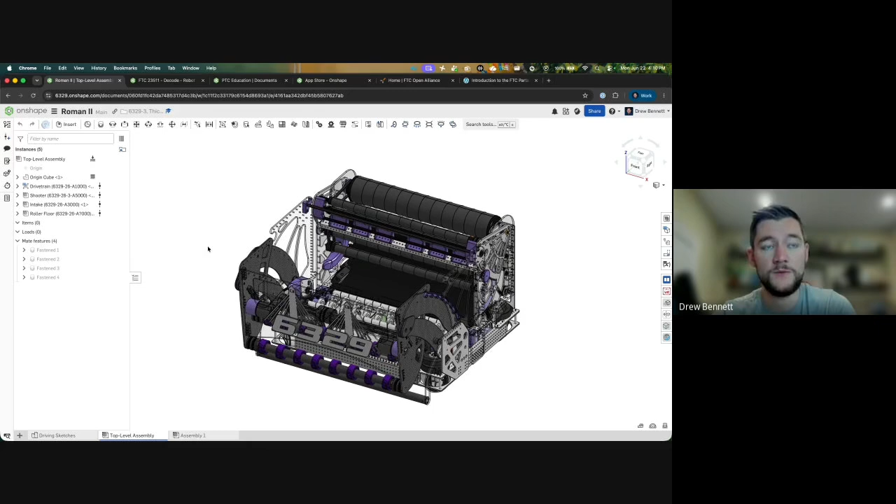And also, like Google Docs, I will open up one of my robot models here. You're able to share this with anybody so they can work collaboratively with you at the same time. When you're making a complex model like this, there's a whole lot of parts, probably a couple hundred different parts. That's too much for any one person to manage on their own, so that's why we have teams. Everybody needs to work together to design all these different mechanisms and then put them together. OnShape makes that really easy, as you can do a lot of distributed work and then combine it all together to see what your final robot is going to look like once you actually make it.

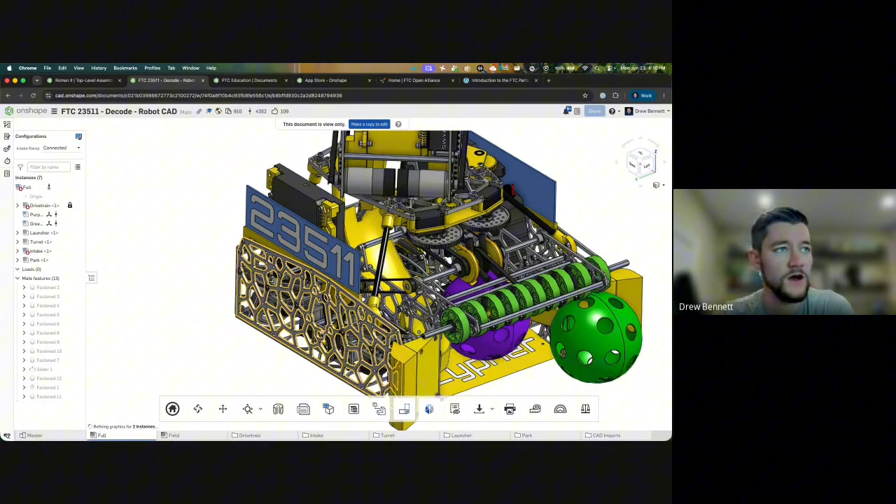So as you can see, I've got an FRC robot pulled up right now. I can also pop over - I'm a big fan of the Seattle Solvers, I love the models they put out every year. I think their models do a great job of highlighting all the different manufacturing techniques you can use with OnShape. You can see all of the yellow components are 3D printed, so a huge amount of 3D printing on their robot. But also you can see all the different CNC routed or fiber laser cut components, combined with a lot of components from a mix of goBILDA and probably some Axon servos. I see a couple different Bear motors in here - those might be goBILDA, might be AndyMark, one of them might be the Rev stuff.

Yeah, so I do love making models like this, and I will dive into this a little bit more to explain how you can make something like this. But yeah, at a base level, OnShape is cloud-based CAD that you can log into from anywhere, access your models, and collaborate. So that's what makes it so powerful.

As you can see, if I get into something like the past robots and open up one of the old ones, you can see there's a ton of different designs in here that show all the different mechanisms that worked together to make a top-level robot. What's really nice about that is it makes it easy for different people on the team - everybody can take a different mechanism and work on it, and then combine it all together at that top level to create one robot.

With that said, that is OnShape sort of at a high level. Now we should get into a little bit deeper - let's actually talk about what is a good robot to show here. I might actually skip back to the 2024 robots, this one is a little bit more fun. So I'll show this robot at a high level, and then I'll actually dive into the sub-documents to explain the thought process here.

What I highly recommend, and I think FRC teams tend to do this pretty well - I feel like FTC teams haven't necessarily adopted this practice yet - is that, as you all know, robots are made of a bunch of different sub-assemblies. You're going to have your shooter, your extension mechanisms. I know those used to be more popular in FTC, but those have kind of changed with the recent rules - you can't do the crazy horizontal extensions anymore, but some of the vertical extensions are still pretty nuts. You're going to have things like that, and then you're also going to have your shooters and other things.

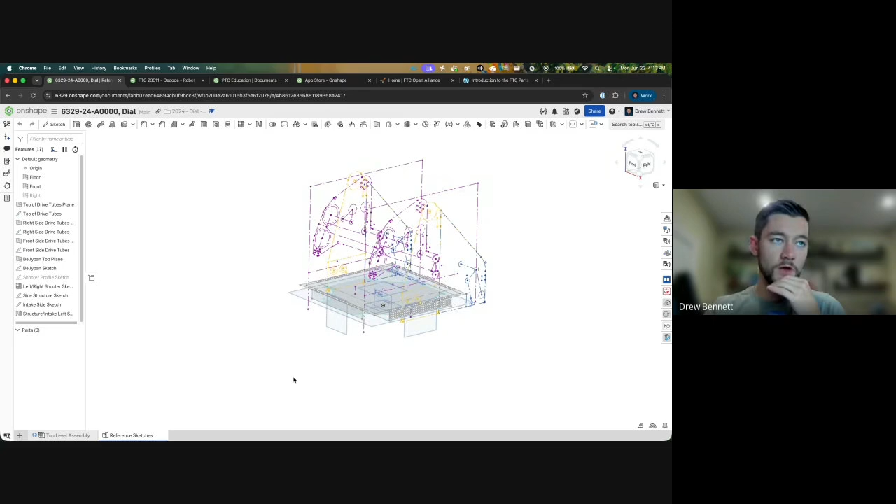What I recommend is that instead of doing everything in one OnShape document, you do it across multiple. I'll show OnShape's different process and tab options, as well as the full top-down design process.

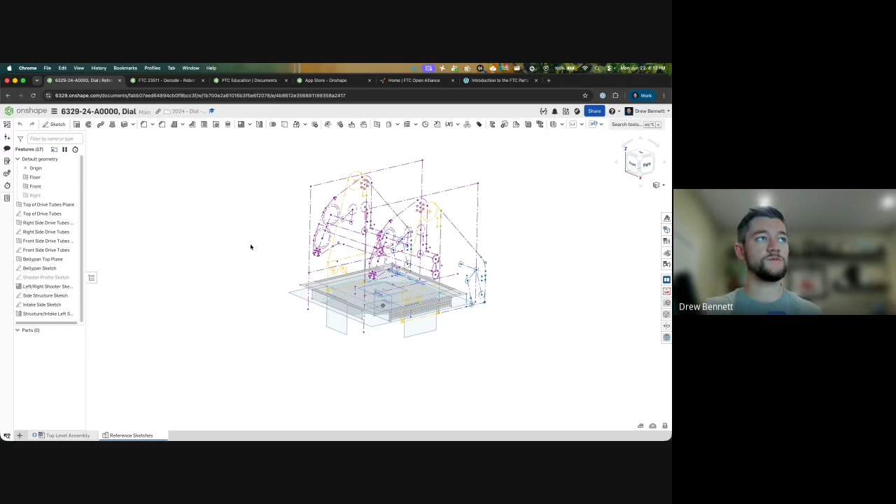The number one thing to do can be one of the trickier parts, and it's usually up to your design leads to figure out. There are good resources for learning this process, and I'll show those. You're going to want to implement top-down design techniques, which start with a sketch to define where everything goes.

As you can see, I've got some different colored sketches here. If I zoom in, it's roughly laying out the dimensions of the drive base and some common mounting holes. Looking at it from the side, it's laying out key motor locations, intake roller locations, shooter roller locations, and pivot locations.

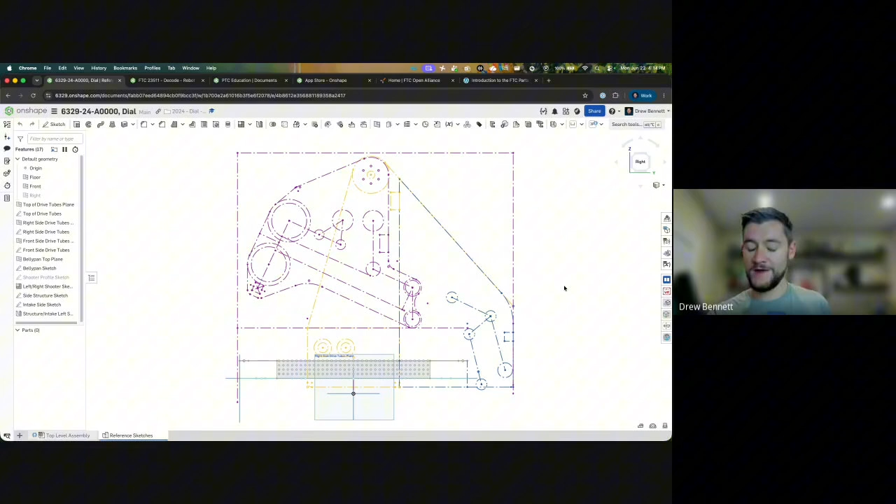Realistically, all the robots we build for FRC or FTC can be broken down into a complex series of rotating shafts, whether that shaft is pivoting in an arm, pivoting for a shooter, pivoting to move a turret, or running an intake roller. Everything is basically a spinning shaft, and the key to a great robot is putting all those shafts in the right spot. That's really all it is.

You've got to place everything correctly, make sure your belts are tight, your chains are tight, your intake roller locations to the floor are correct. You need good compression, not too much, not too little, because otherwise it won't pick up anything. Defining those at the sketch level to start is super powerful, because then you can use that to drive the entire rest of the design.

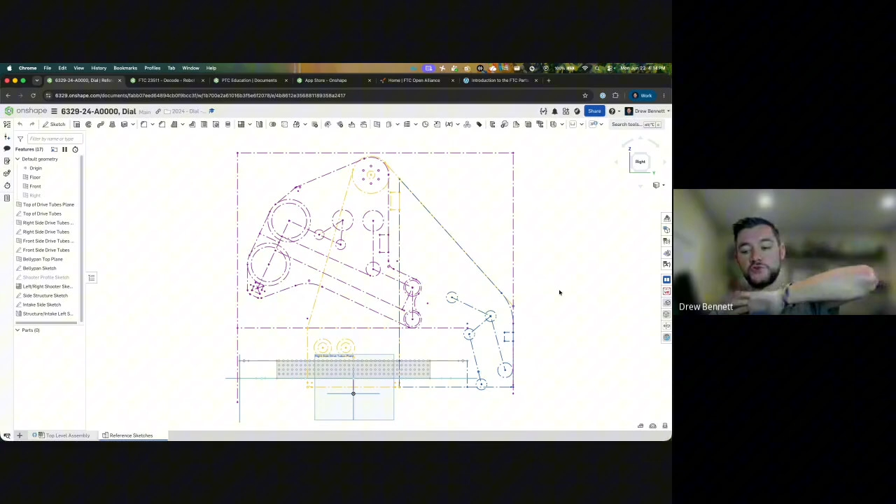I can open up one of these sketches so you can see this defined the dimensions of the drive base here. And if I get into it, I can show something like the side structure sketch.

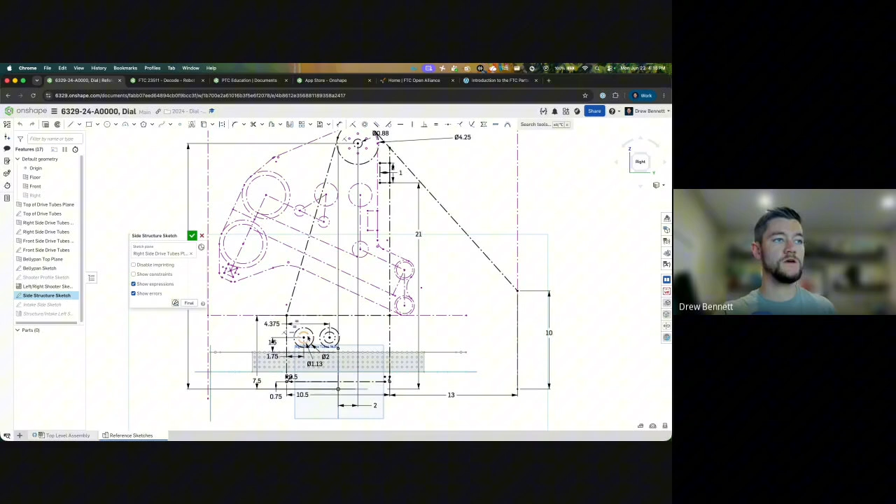You can see this is defining where a couple of different motors are going. This was driving the actual pivot all the way up here. You can see laying all that out and showing where the motors would go to also drive the intake up front, laying out some of the key panel dimensions.

Same with the intake, this one makes a lot more sense. If I zoom in, you can see this intake roller is defined as a size, as well as how far it is from the floor. So we know it's going to be exactly—I grab that bottom plane there. You can see minimum distance measured down is 1.84.

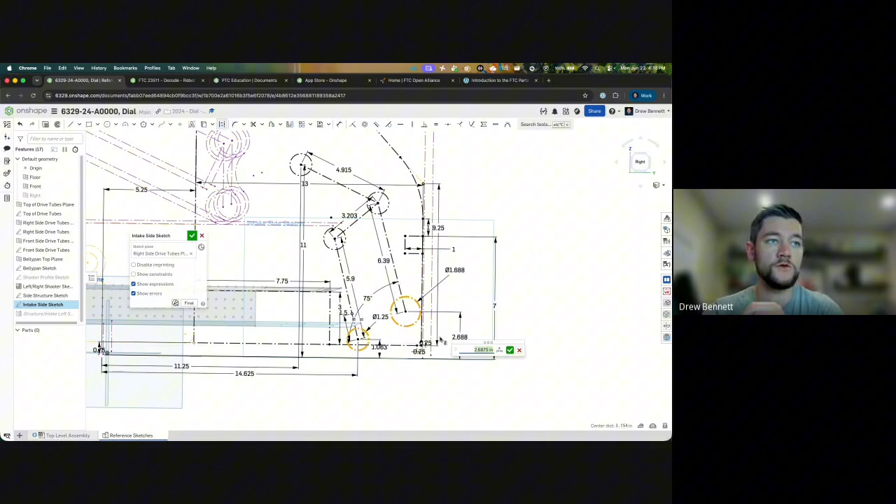So I know that compressing that game piece, it's going to be that distance from the floor, and that's a number I can edit and change as needed, also changing all the subsequent rollers off of that one. This one needs to match a specific belt spacing based on the pulleys I choose. This roller to this roller needs to fit a specific compression, so I'm not squeezing the game piece too much, or not having enough compression, so it will make it up through the system.

So step one is making your sketches. If you're wondering how do I learn how to sketch, I'm going to skip over to the OnShape Learning Center.

I want to put this relatively early so everybody knows this is a resource you have, and I'm going to keep going back and forth between things I can show in the Learning Center. Up next to the share button, you can click Go to Learning Center, and it's going to open up learn.onshape.com. I highly recommend everybody checks out the Learning Center.

This is basically a mandatory learning location if you want to be proficient with OnShape and successfully design an FTC robot. So if you're looking to learn these skills I am showing, the best thing you can do is go to the New to CAD section, where you'll see a pathway on Introduction to Sketching.

Of course, I don't expect you to be able to make all these complex sketches I just showed, but if you go through a course like this, which takes roughly an hour—honestly, I think most students can do it a little faster—you'll be able to do the things I was just showing.

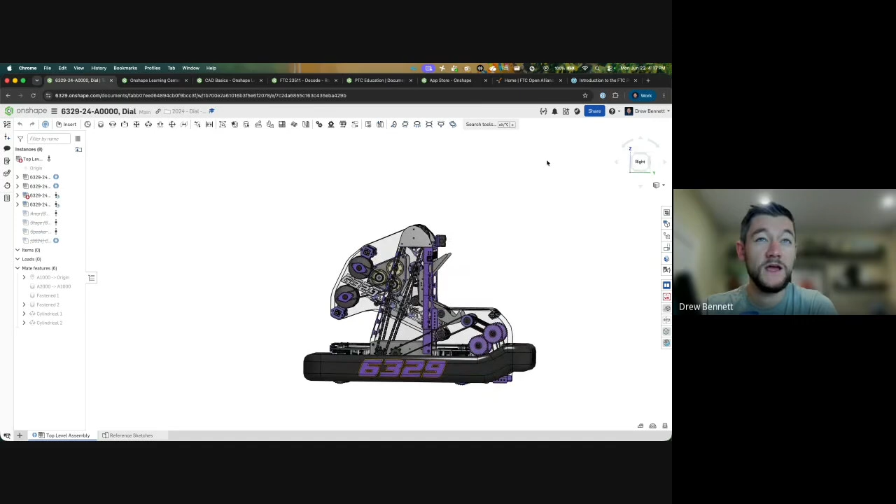So yeah, most robots should start as a sketch, laying out where all of your different mechanisms should go. And now if the assembly will load, there you go. You can see that if you squint really hard, it kind of does look like the sketch. You can see where those roller locations were in reference to those sketches. You can see that the overall larger shooter wheels, as well as some of these feed wheels to hold the game piece and pass it into the shooting wheels, are in those locations. So those sketches did drive the ultimate architecture of the much larger robot, which is pretty cool.

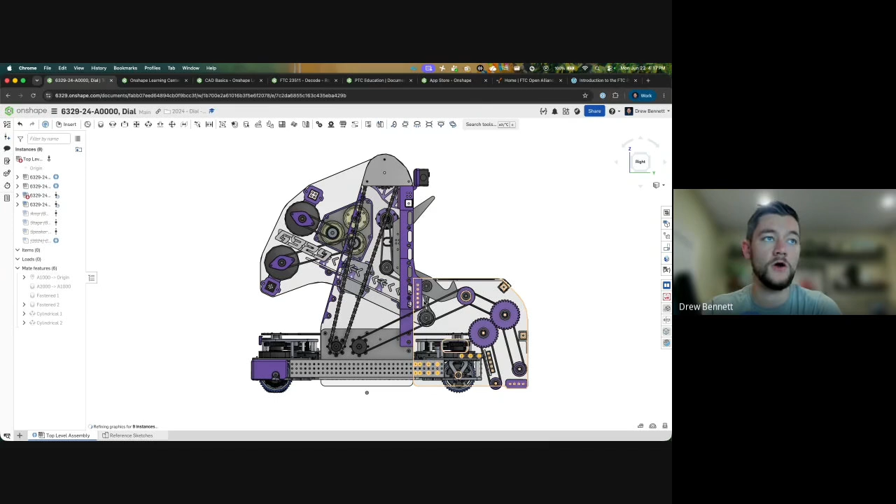The major benefit of that is two things. One, you can bring these sketches into all of your sub-assemblies to make sure that they're all going to line up and are all referencing those same locations for any of these circles, shafts, or different points.

And if you do it correctly, when you update a location - let's say I figured out that the compression between these two rollers is a little bit too tight and I need to make a change there - by editing this one sketch, editing those numbers, I can actually change all of the subsequent parts of the robot. It'll all update pretty quickly. So that's pretty cool.

So from there, once you've got this set up, you're going to need to start actually making your parts. All I've done right now is make sketches. That does not get you a robot. You need to start actually 3D modeling instead of just 2D sketching.

So I'll go back to my folder here and open up something like - I think the intake one is pretty good, this shows off the process pretty well. As you can see right here, it's going to contain all the different plates. It's going to take a second to load because my internet is bad. Awesome, cool, there we go.

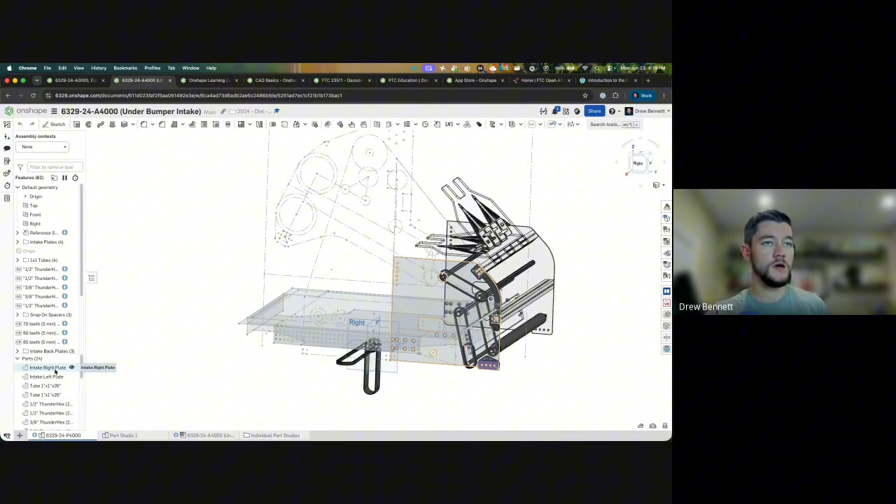So you can see here that I have imported those sketches. Let me organize my thoughts. As you can see, it kind of looks like an assembly - there's a whole lot of different parts here, but these are all individual parts modeled in place to make the assembly process much easier, and to make sure that when I've modeled a part to fit in a location, it's going to fit in that location.

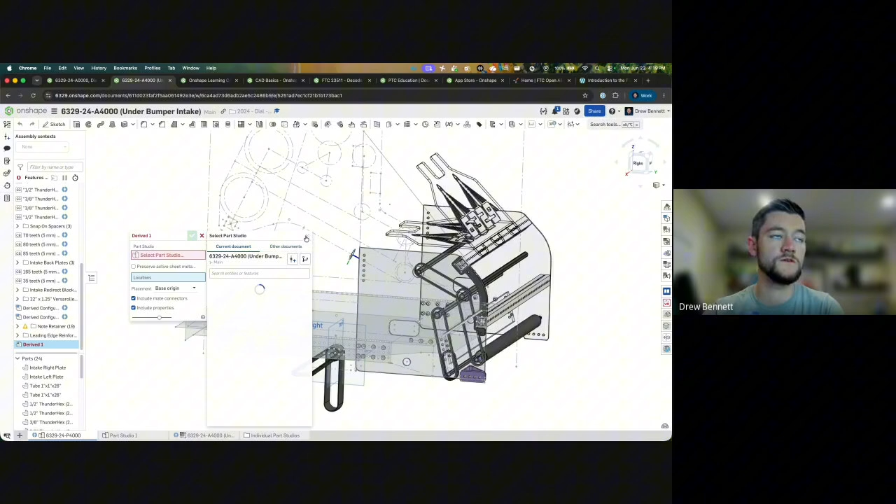So you can see the very first thing we do is import those reference sketches using a derived feature. The derived feature is up here - it allows you to bring in reference material from any other location in OnShape. So I went to the other documents, found those sketches, and derived them into this one, just so I had all of those different reference locations that you can see. I can click any one of them, measure to them, bring them into my current part design process.

With that said, there's a pretty simple process of adding things like my shafts. Of course this is a much larger shaft - you'd be using something like the probably 8mm Rex shaft or any of the other popular shafting types from FTC suppliers. But the general concept applies.

If I pop over to the Seattle Solvers robot, the thing they did differently, and what I would recommend following this process, is - this robot is excellent, but you can see that each of the different components is in one OnShape document. It's just going to load slower. If you break it up so that the drivetrain is separate...

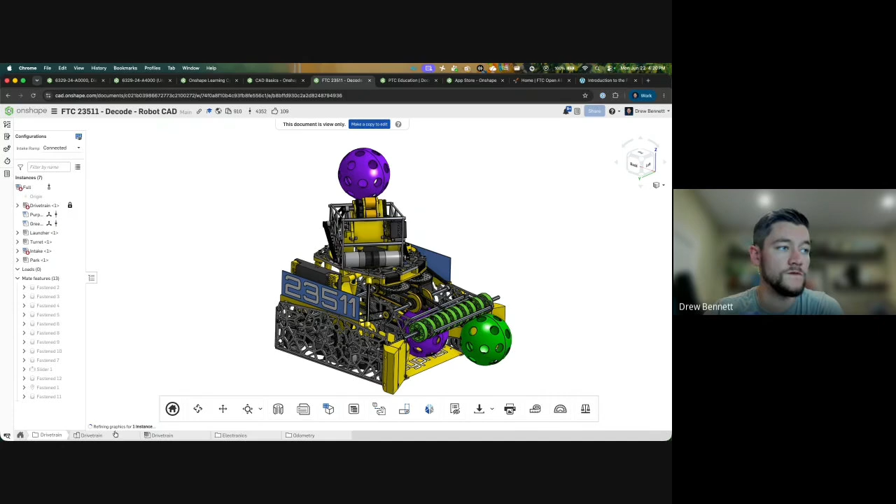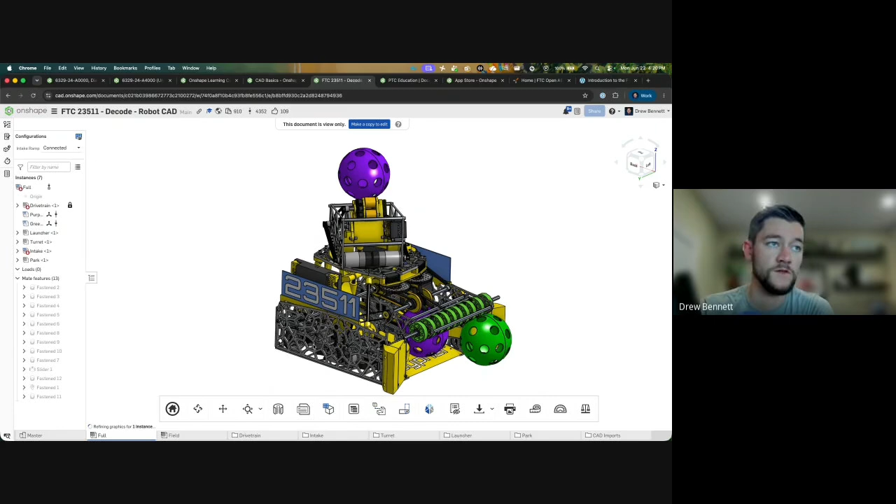Basically, if you took all of these four tabs and moved them into their own document titled drivetrain, and then grabbed your intake and moved it into a new document, and your turret and put it in a new document, things are going to load faster, and it makes it really easy to say what student needs to be working on what document, to then combine back at the top level. So you can do it either way - this isn't necessarily wrong. Again, they made a gorgeous robot that performed very well, but I think it's going to be a little bit easier organization-wise if instead of having this all in one, you split it up into multiple, as I'm showing there.

So you can see the general concept, but they do have this intake assembly - it is separate, and you can see that it was modeled. Let me get it loaded up, and you'll see that it's going to have a sketch right there.

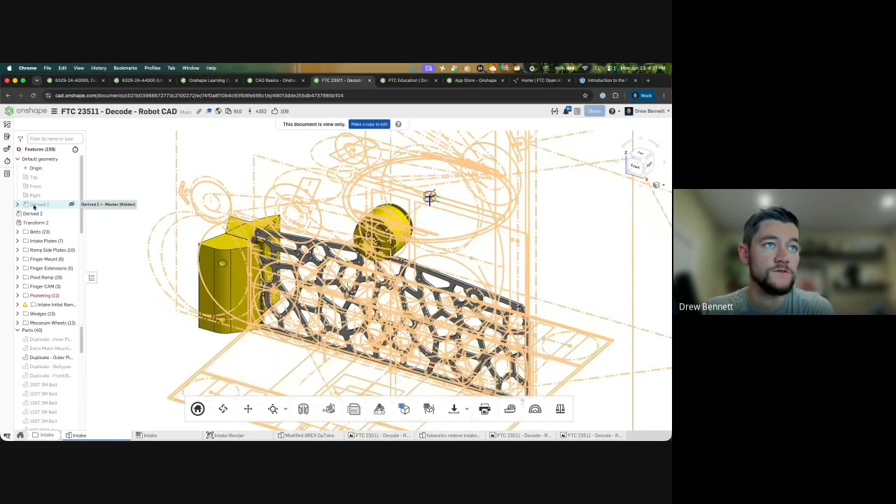Same process - you can see they derived some of those different components in their sketches, and then it was just a matter of modeling all of the different things that they needed. If I show them all, you can see they got a whole bunch of plates, 3D printed parts, different stiffeners, and different types of rollers with integrated pulleys. You're going to model those as different sub-assemblies and then make it into an assembly like this.

Same concept, bigger robot - you're using those sketches as your references, and you'll model your parts. Once you are ready to go, you're going to be modeling. Generally, what I like to model part-wise is things that you're going to be making, especially if you're making it as a custom component on your CNC router, fiber laser, or other milling equipment, and also things that you're going to 3D print.

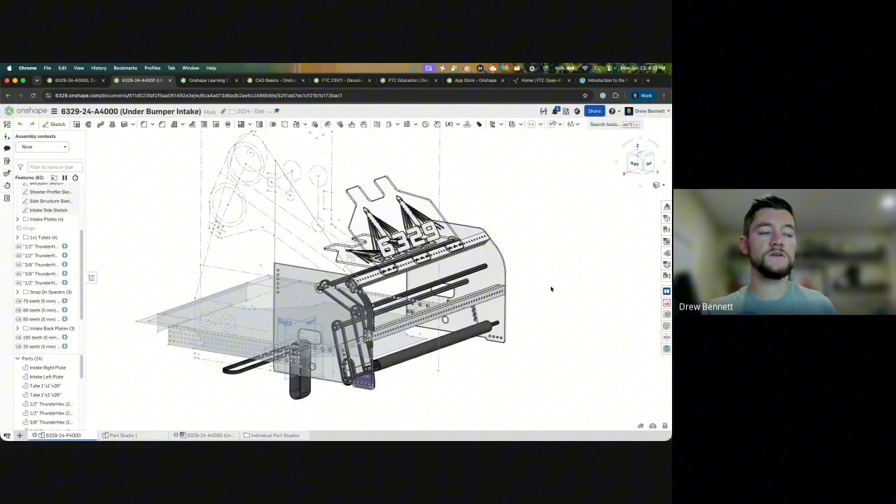As you can see here, all these plastic plates are custom, these tubes are custom cut - you could do it a couple different ways - but any of the purple components are 3D printed, so those need to be modeled here.

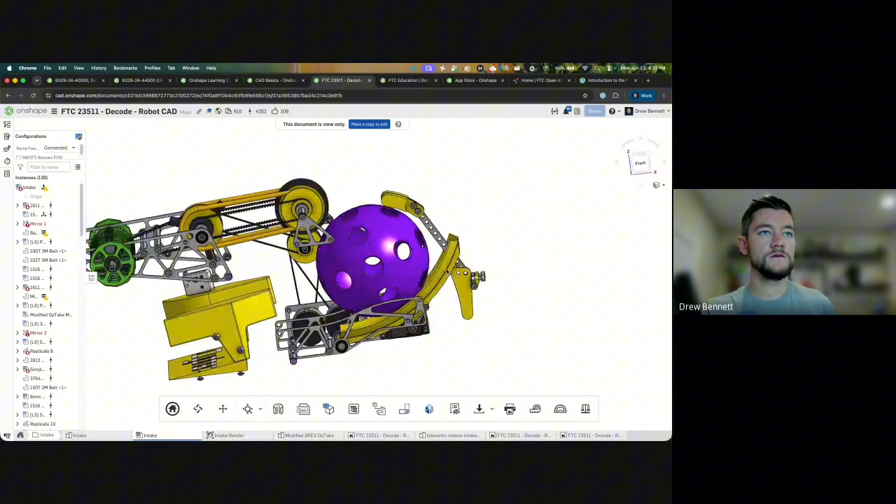For your FTC robot, as you can see, they modeled a bunch of the parts, but when you get to the assembly level, they add in the servos, the motors, and these wheels - they did not model those at the part level.

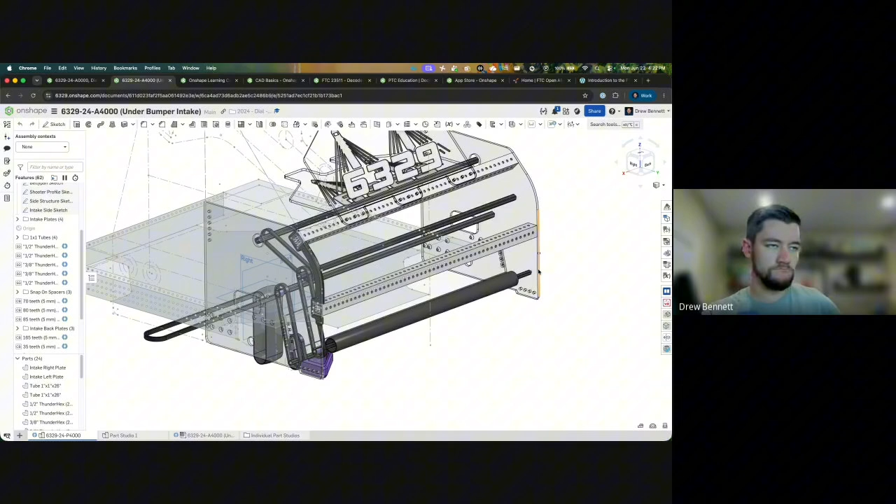So the best way to get access to these components so that you can use them - I'm skipping around a whole bunch here, but hopefully it's cohesive enough to understand - there is a great application that contains all of the components that you can buy from Rev, Pitsco, goBILDA, AndyMark, all those different suppliers. They are in the Insert Tool app, and I'll show how to add this to your account.

So you can see you've got an app here, and then you click on Global Libraries, and you'll see you've got all of your favorite suppliers nicely labeled. If you wanted to bring in any component, I'll show how to bring in those AndyMark flex wheels - you go AndyMark, wheels, compliant wheel, and choose what size you would like, what you would like the center hole to be, and what durometer you would like. We'll go green, we'll go 2, click generate, and then I can drop that into my part studio or into my assembly.

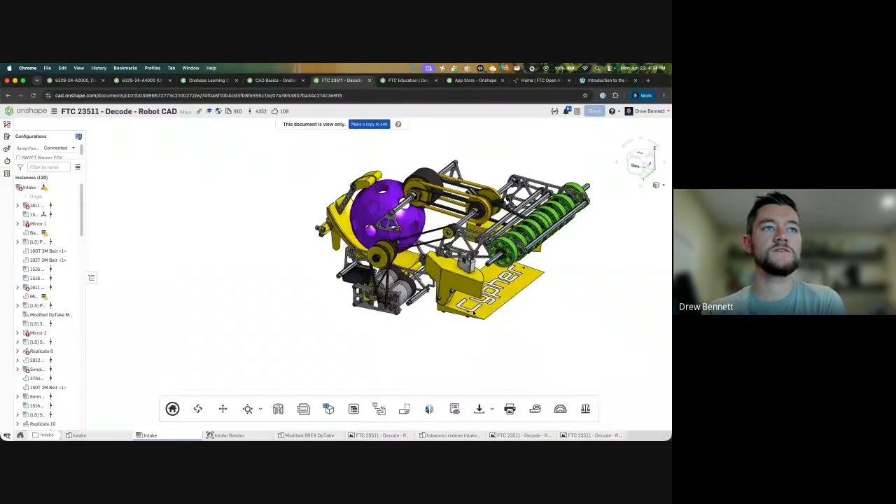Either works, but that is what is going to allow you to bring in all of those different components, so you can combine the things that you have modeled with the things that you're going to purchase to make a fully accurate model of each subsystem of your robot. Hopefully that all makes sense - that is how an FTC model like this was made, because obviously you're not going to be modeling sensors like this yourself. This is something you can very easily insert from the library and add into your assemblies - you just have to model the mounting holes.

So of course the question is, how do I add that application to my account? Pretty simple - if you want to go up next to the share button, click on go to App Store, and then go to Insert Tool. If you search for that, you will see FTC Insert Tool. Shout out to Team 2901 for constantly maintaining and doing so much work to provide this to the larger FTC community.

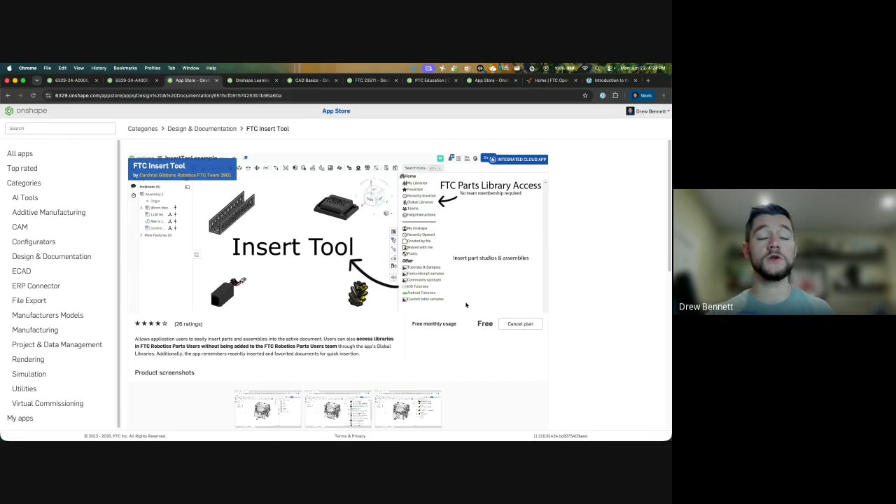You can see I'm already subscribed to it, so it just asks if I want to get rid of it - I obviously don't want to do that because it's an application I use. But for all new users who are not subscribed to the application yet, when you get to this page, you'll see a blue subscribe button. It's free, it's going to stay free, you have nothing to worry about. You can just click subscribe and click yes. Then in any of your Onshape documents, when you refresh your page, you will see the FTC insert tool icon pop up, and you're able to use it to drop in any of those components.

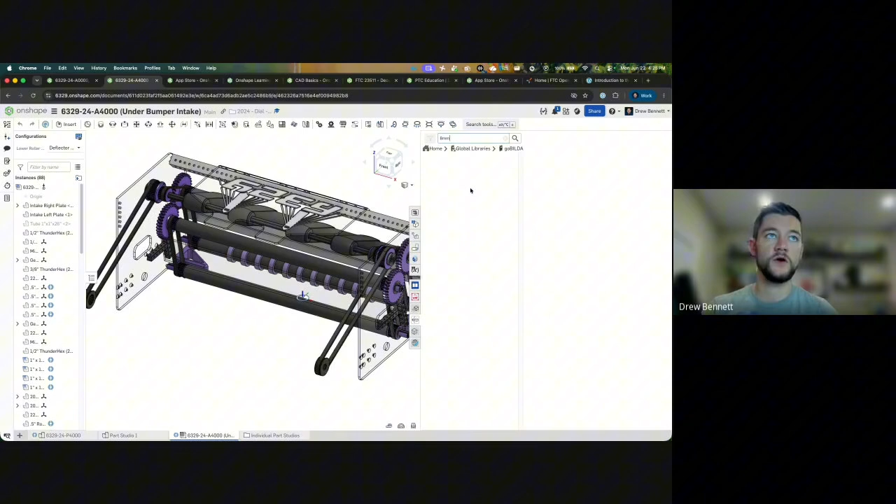It makes it really easy to find anything you're looking for, and of course you can also search by name and number. If you open up the goBILDA catalog and search for, say, 8mm, I'll get a ton of parts for all the different 8mm hex components they have. You can get standoffs, couplers, wheels, and all those good things teams love to use from goBILDA. All those components are in here for you to use, and you can just drop them into your assemblies and build around them.

So very, very powerful. Highly recommend grabbing the app if you haven't yet, you're making a lot more work for yourself. There's no need to go to the supplier websites and grab these part models yourself and do work to them. A lot of great work has already been done, so you can just use them directly in your assemblies.

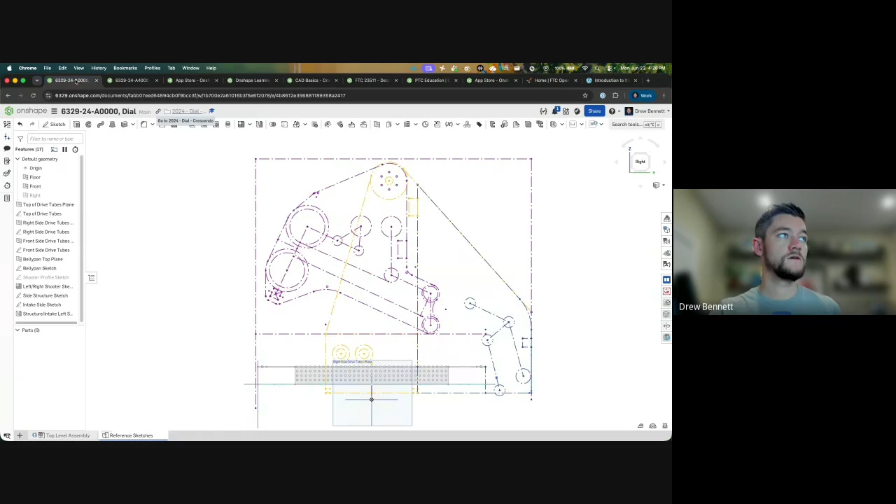So I've talked about how you're able to create these sketches and then create parts in Part Studios. You can make as many parts as you want in a Part Studio, which is super powerful to make sure they're all going to fit. Of course, you can then insert all of those parts into your assemblies, add in your COTS components to make an assembly, and then it's just a matter of combining them all together to make something that looks like this. So I guess I can skip over, probably you will be making something that looks more like this.

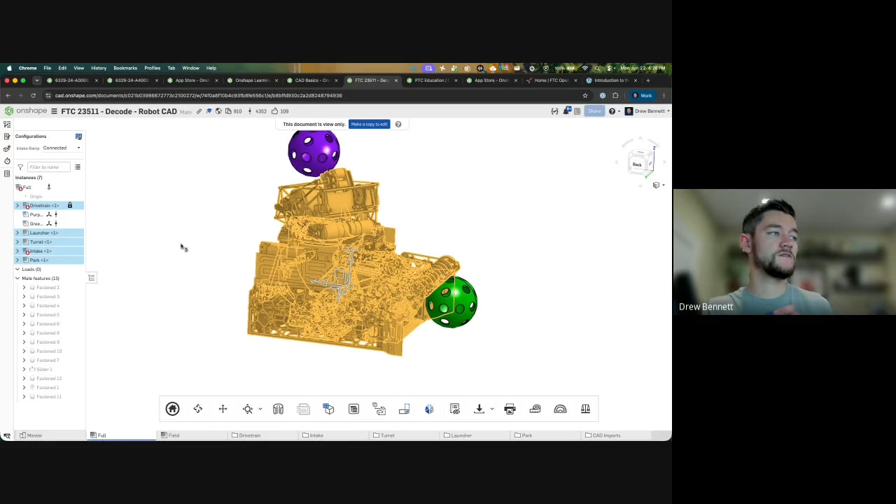We'll get it loaded up so you can see the full robot. As you can see, this is just bringing in the sub-assemblies - their drivetrain, launcher, turret, intake, and park. Of course, they did not model the balls, those are just from the FTC field. But combining these 5 sub-assemblies gives you one very clean, very cohesive robot.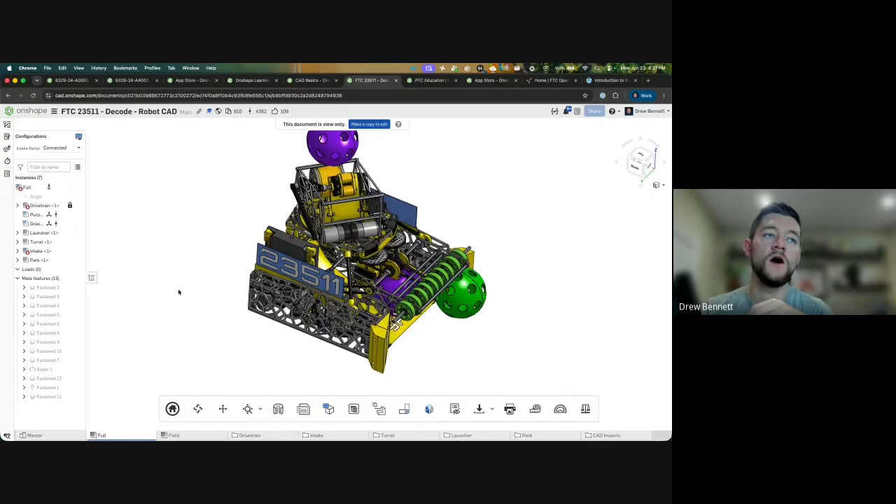So definitely one of the things your design lead will need to figure out is how you want to label your sub-assemblies and what goes into each one. But honestly, once you've built an FTC robot or two, been to a competition or two, and seen some other teams, it becomes pretty second nature to understand what's an intake, what's a park mechanism, what's my launcher, what's my turret, what's my extension mechanism, other types of intakes, handoffs, things like that. So it's up to your judgment to determine how you want to break things up, but usually it's not too hard to do.

Cool, it looks like I'm roughly half an hour in, so not doing too bad on time.

So something else I've talked a lot about is this concept of top-down design, which is starting from that set of sketches, bringing those into your Part Studios and designing around those sketches to make sure everything's going to line up, and then bringing it all back together.

Top-down design is a complex topic. It's definitely something FTC and FRC students alike can learn and master, but it is tricky and takes some practice. However, it's a very industry-common practice, so this is something you learn right now. You are going to be setting yourself up fantastically for college and for any other type of role if you're going to be using CAD on the regular. Pretty much all of your favorite everyday products are designed using top-down design techniques. So if you learn it now, you'll be much better off later on.

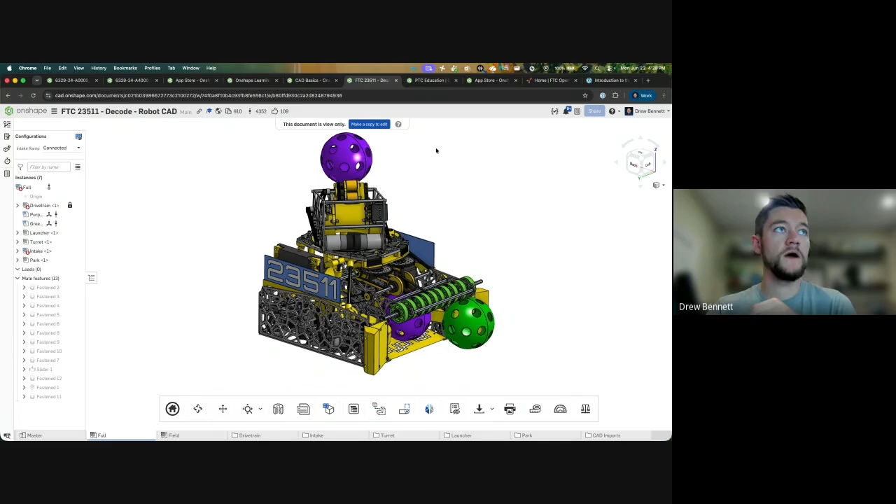So as you might suspect, there's something in the OnShape Learning Center that can help teach you the concepts of top-down design. We go to the OnShape Learning Center again and type in top-down, and I should be met with the top-down design learning pathway. It uses a bike as the example here, but honestly it just goes to show that this is how real everyday products are modeled.

So it's going to walk you through different things you can do, especially this master model. This is the one that's really going to walk you through the steps of making a sketch, doing the derives, modeling everything separately, and then bringing it all back together into one cohesive model. But all of these three, obviously, you need to know how to model a part if you're going to make anything when it comes to robotics. So, of course, that is course number 1.

In context design can be a little tricky, but it is worth knowing. Really, it's Part Studios and Master Model. If you can learn these two things, you'll be in good shape. I've been talking a lot, skipping around a lot, but I think that's a relatively cohesive understanding of all the things you're going to need to know, and the applications you're going to need to be able to use.

Something else that's helpful - this is ftconshape.com, managed by FTC Team 2901 Purple Gears. You can see they have different posts explaining how they like to use different parts of their product and how the parts library works. You can reach out to them with questions, but there are some very interesting things I'd recommend reading through about how they set up their part library and how they expect people to use it, because I think this will make everybody more proficient with using the parts library once you've read through their website. Definitely go check that out.

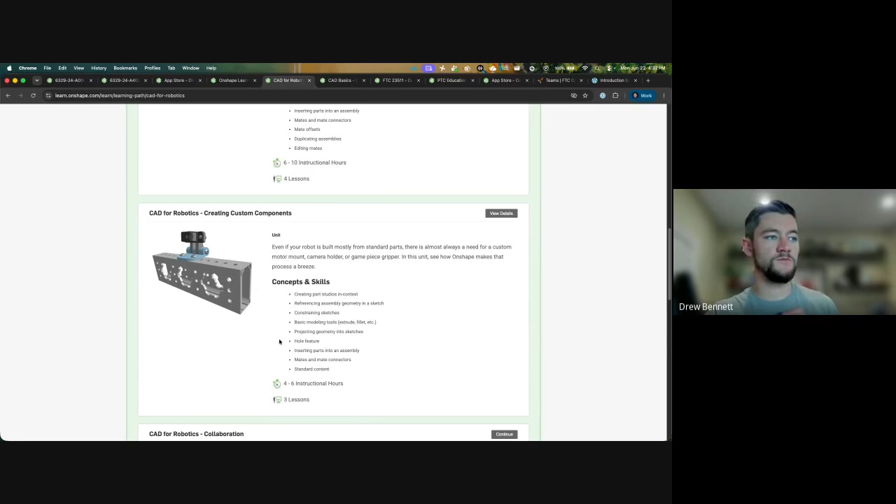It also talks about how to make custom components, how to set up for collaboration, some different manufacturing techniques to implement, and the different ways we recommend you communicate your design with both your team and the judges at competitions. Definitely recommend, especially if you're a mentor with a lot of new students looking to learn OnShape, I would look through these resources and pick out the ones that best fit your team's needs.

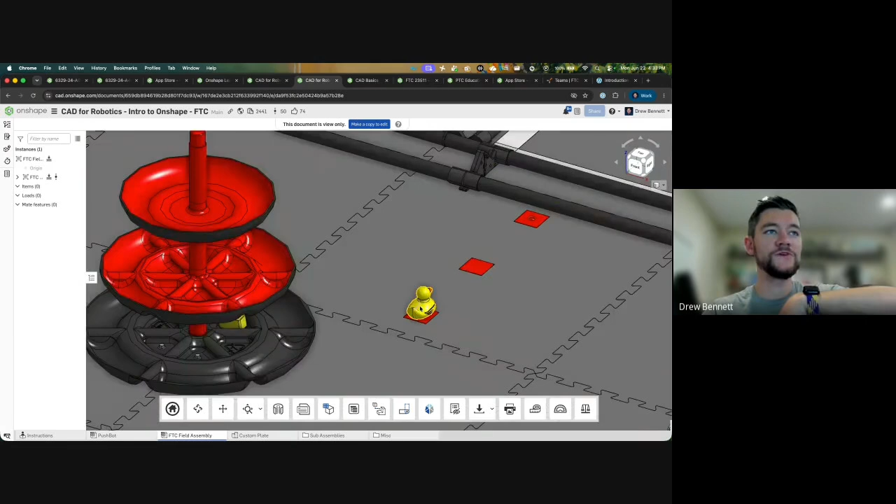Honestly, the intro to OnShape is really fun, as they are tailored for FTC, FRC, or VEX. The FTC model is pretty cool - of course, you're going to have to learn how to use the mouse controls and different controls. So you're actually going to have to do a small scavenger hunt, trying to find all the different things hidden around an old FTC field. Pretty cool - this is a good way to get familiar with the controls.

So I'd highly recommend checking this out if you're a total novice to OnShape. If you're a little more familiar with OnShape, you can probably skip this one and move on to the further components down the curriculum list. But there's a little bit of everything here depending on your skill level when you decide to pick up OnShape.

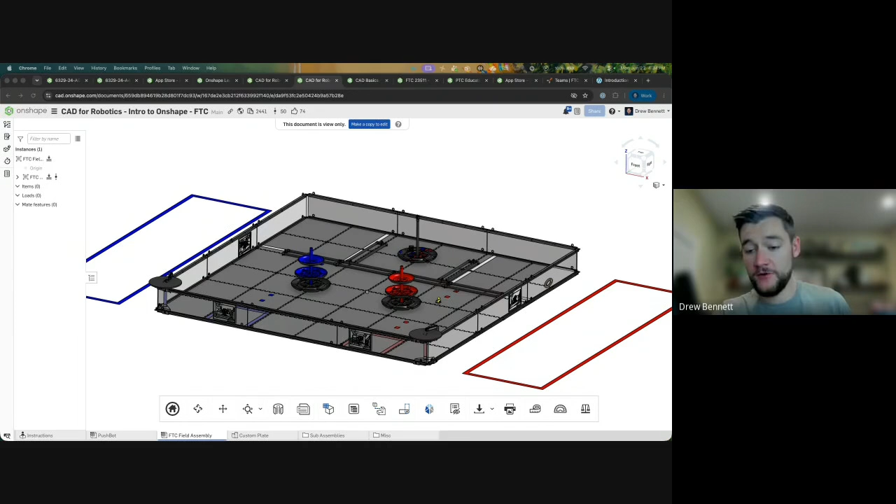I don't know if I can, I've got a small screen. So honestly, if you just want to shout out questions, it might be easier. I'm trying to see if I can actually see hands if I make the window a little larger. Go on.

How do you bring in a part from a vendor's website if it's not already in a library?

Okay, yeah, sure. I will say, if you run into situations like that, it's never a bad idea to reach out to the library team. Any questions, send an email to them saying, hey, I've been looking for this part, I think other teams are going to want it, is there any way we can get it added? They're always looking for feedback on their parts list.

But let's say there is a component that you want to use. I'm just going to go back to, what tab do I want to use? I'll use this one, I'll just go back to OnShape and create a new document here. This part of the process isn't particularly relevant, you'll learn how to make and create documents, that's step one. But yeah, to bring anything in from outside...

Let's just use GoBilda as our example, because I know GoBilda is very popular. So let's say we want to grab one of the intake wheels. This one is a great one to work with. These are all in the library, but just as a simple example, let's say I want to grab this boot wheel.

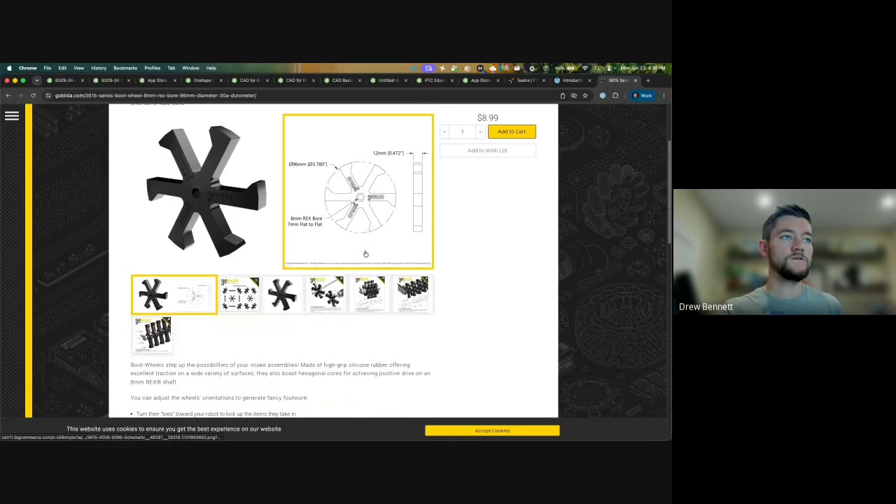So you can go to a product page, and whether it's Rev, AndyMark, or GoBilda, you'll be able to see that they're either going to provide a step file - this is what you're looking for - or in the case of Rev, let me make sure... didn't type it quite right, but I was close.

I checked the Duo, let's check out the new products. Let's open up something like, sure, the Duo flap wheels. I like my intake wheels, I think that's the most fun part of the robot to work with.

You can see that on Rev's website, they actually have a big OnShape button. So it depends what supplier you're working with. If you are working with Rev components, you can actually just click on the OnShape link here, and it will jump you to Rev's model of a part. Then you can grab this and bring it into your assemblies.

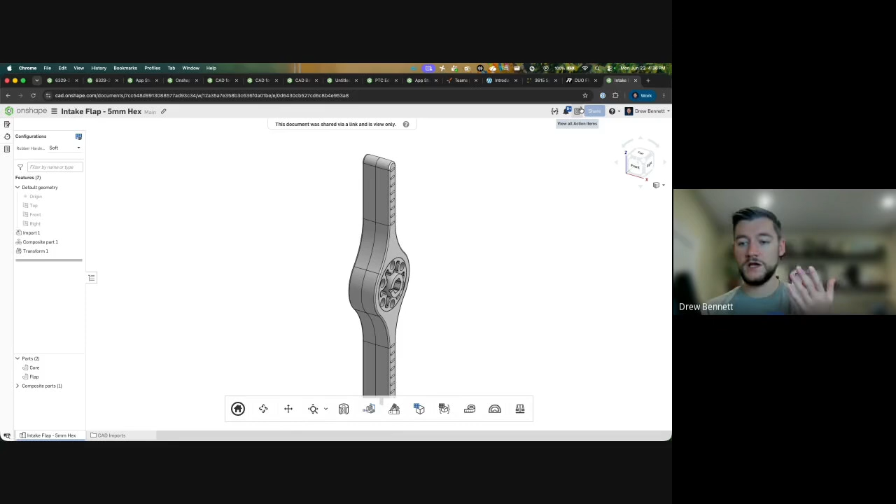But for your sake, if you are going to a different vendor website and you want to import it into OnShape, what you're going to do is grab that step file. You can click on the step file, you'll see that it has downloaded right there. You are then going to go over to, what did I make a new one, there we go, and you can import.

That was really fast, hold on. If you go here to insert new tab, you can click on import. You're going to have to see everything I've got there. And then you can grab, oh, it came in as a zip file. Hold on, well if it downloads as a zip, you open up the zip, you can then upload the steps.

So give me a second to open up Finder and unzip that. I don't need to show that part of the process, everybody can figure that out, everybody has a way to open zip files. There we go, all right.

Now I can import and grab the step file, click open. And you'll see that you can just click import to this document. If you're working with something like a servo or a small motor, click the combine to a single part studio - that'll bring all the parts together in one import, makes life a little bit easier. So I'll just use that option here and click import.

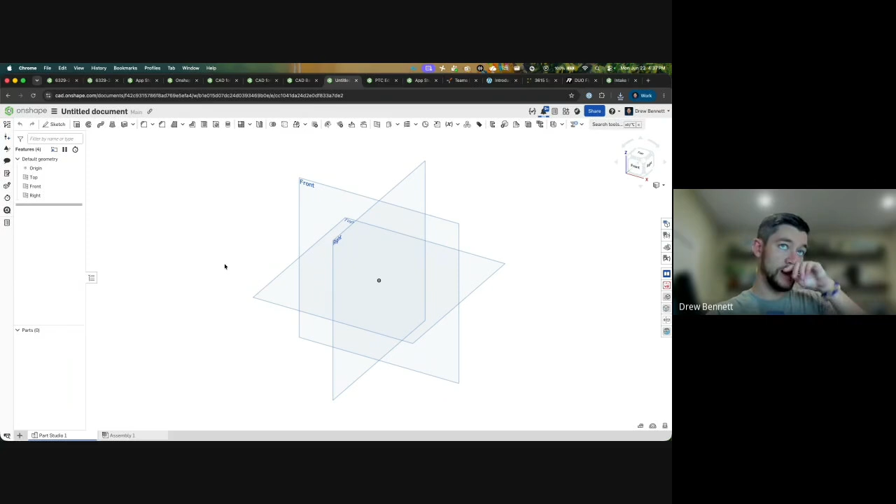Then you're going to see that up here in the top right corner, OnShape is giving you a sort of update of what it is thinking about at any given time. So it has uploaded the file.

It's now going to translate, do a little bit of post-processing, and then you'll be able to actually use the part. It'll take just a second and then we'll have our GoBILDA wheel to play with. As you can see, that step file is now uploaded into OnShape and it's currently thinking about it. So yeah, that's the process of importing parts.

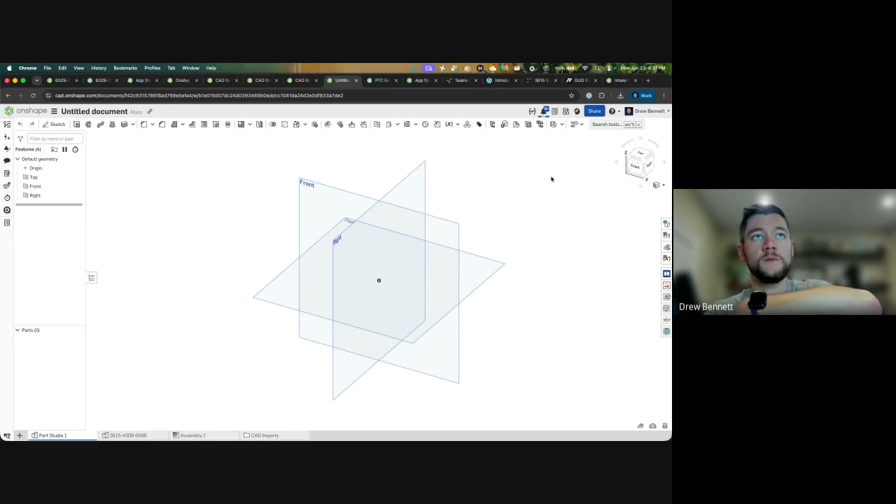It's pretty simple. Once you've done that, you'll be able to set the material. You'll be able to set part numbers if you want, for bill of materials purposes. You can do things like that. So I can go over here now, and in this part studio it'll load up and show me, there's my wheel. I love it.

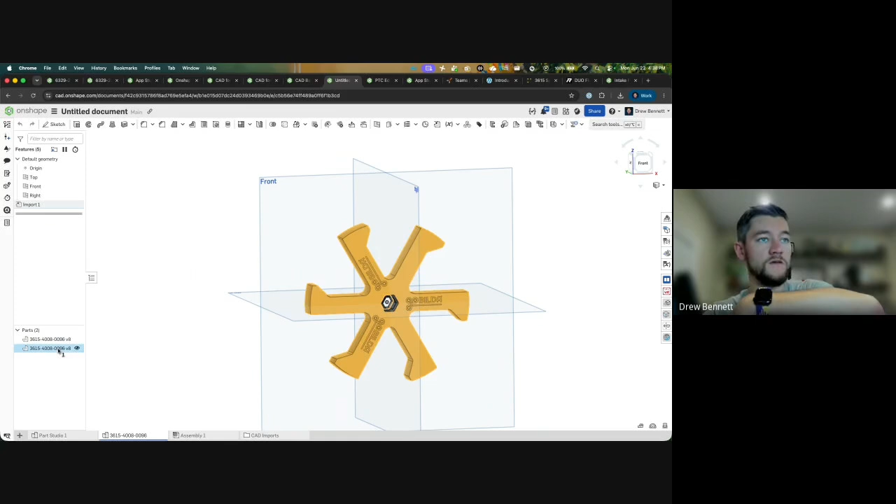Something I could do here, as you can see, is actually the core of the wheel and then the actual outside of the wheel, because technically those are two different parts. It's got a hard plastic inside and a very soft rubber outside. Those are two different parts.

I can actually do a little bonus trick. If you click on two parts and they overlap, you can use the Boolean feature. This is something you'll learn about in the Learning Center. You can actually stick the two parts together and they should turn into one. Then you can set it to be rubber. So you can see now it's one part in my parts list.

I can right click and do things like edit the appearance. Of course, it's orange - you can't really dye it a different color, but I could make it orange. I can make it green, whatever you'd like.

You can also right click and assign material, and I'd probably set it to be something like neoprene rubber. It's not neoprene, but it's close enough.

So what's nice about that is - I'm skipping around a lot, sorry - if I go to the mass properties in the bottom right corner of my part studio and click on that, now when I click on the part it'll tell me how much it weighs, which is super useful.

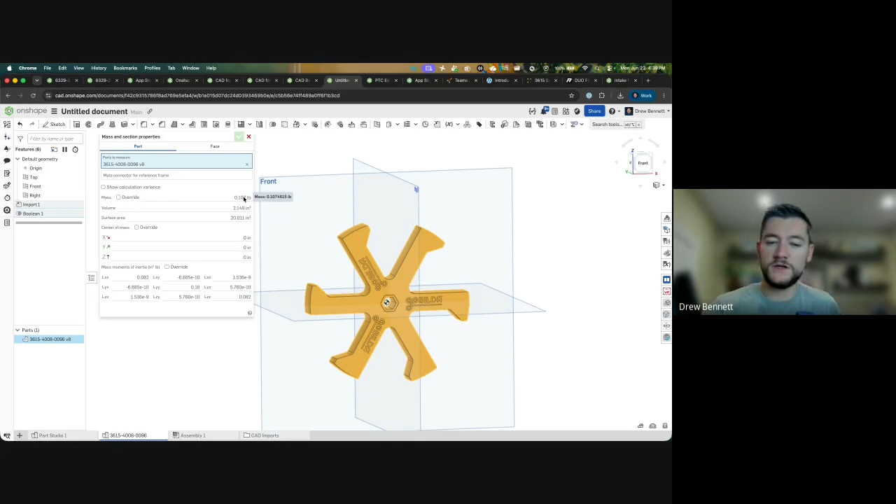Usually weight isn't too much of an issue with FTC robots, but if you're trying to figure out where your center of gravity is - like let's say it's another game where you need to lift something really high - you need to figure out your center of gravity to determine how fast you can drive without face planting. This becomes really relevant when you set your robot to max extension and figure out where your center of gravity is when reaching really high, and how likely you are to tip over.

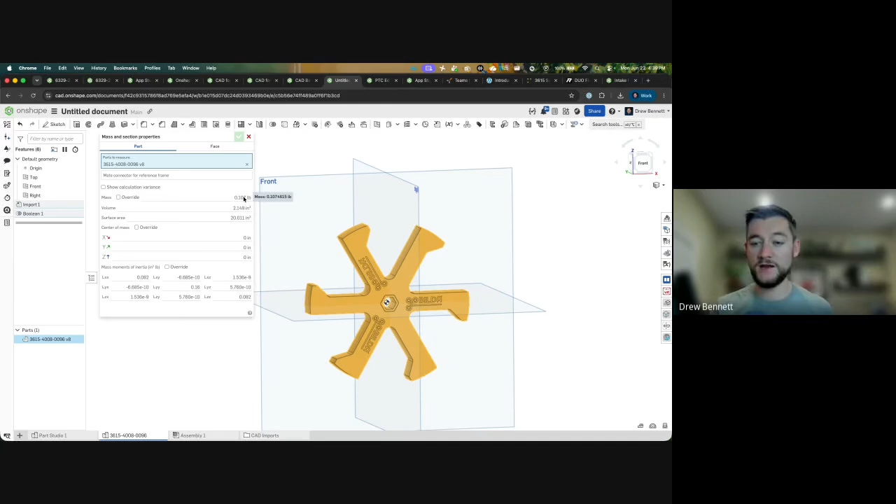So yeah, does that answer your question about bringing in components from outside websites? Awesome, good question. Cool. Does anyone else have any other questions?

Since many FTC teams design parts that eventually are custom manufactured, such as 3D printed or CNC machined, what design practices can help ensure a CAD model is easy and reliable to manufacture?

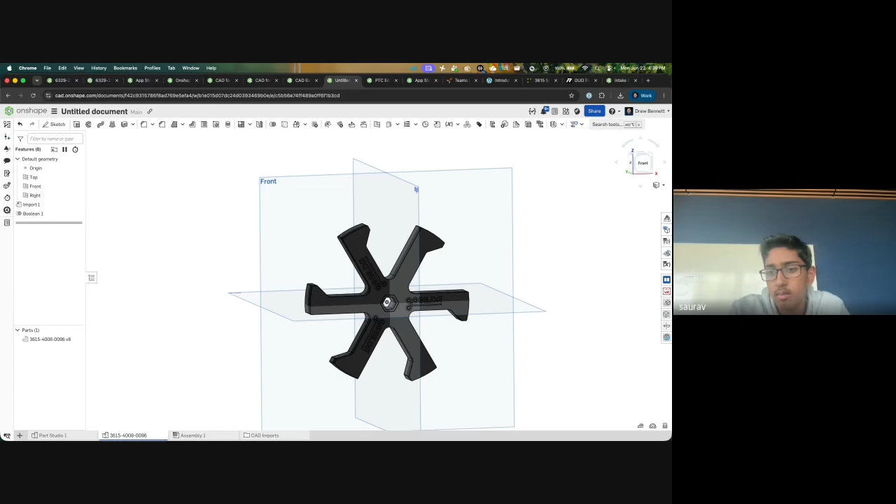Ooh, that's a good one. Design practices - it really is going to come down to what tools you have and how well versed your team is with using them. So something that I would recommend...

For 3D printing - and designing for 3D printing could be its own whole webinar, that's a pretty deep topic in itself - but something I like to do is encourage people to really think, as they're modeling a part for 3D printing, about how they're actually going to orient it on the print bed. Because I'm sure we're all familiar with 3D printers - most of them cannot just print over air. They've got to be printing on something, whether it's the bed or other plastic that's already been printed.

You can do some amount of overhang, but it's always better to keep it within its own volume or use support material. So the number one thing to think about is don't just make a part and then get to the point of 'oh, I need to 3D print that' and not have thought about that from the get-go. Really think about how you're going to make it as you're designing it, so you can match it to whatever you need.

A lot of the metal components - something like, I don't even know if I have it up anymore, I probably don't - but like the Seattle Solvers robot, sorry, I've got so many tabs now at this point.

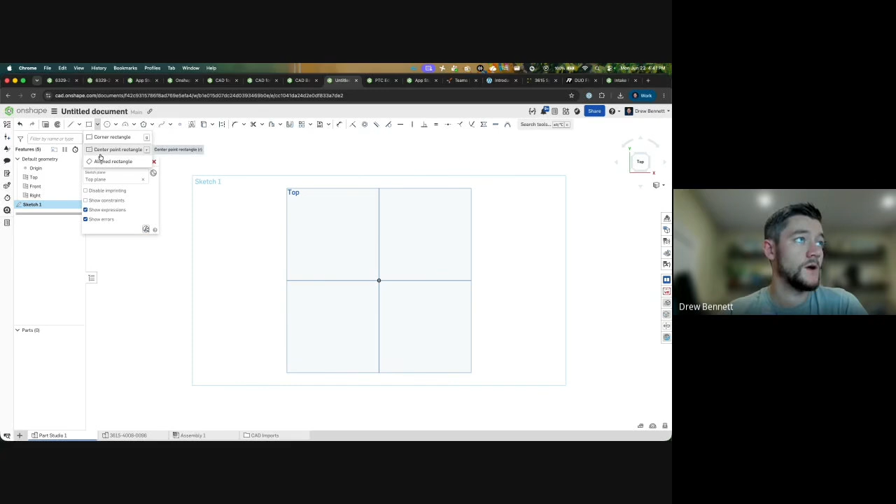I guess I can demo that real quick. So something I like to do, this is getting a little into the weeds, but it's a good topic to talk about. I'm just going to make a plate real quick, and you'll have to work with me here. Let's say I'm going to make it 3 millimeters thick.

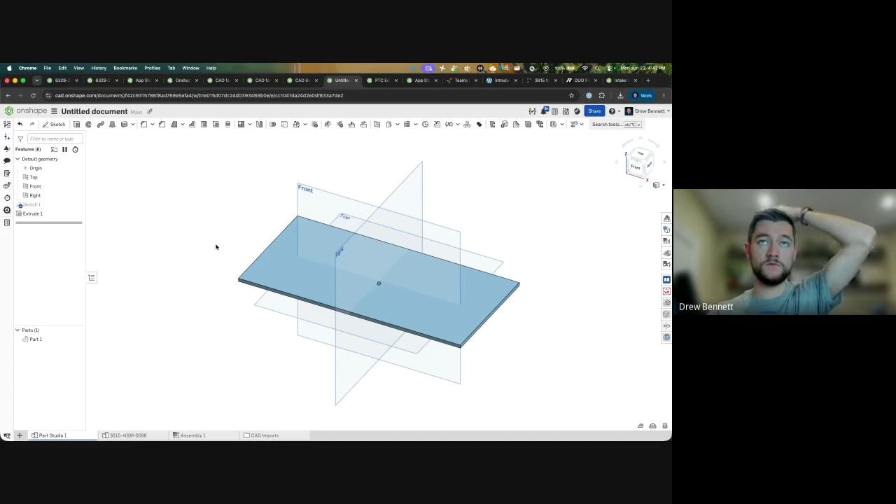You can make this flat plate and very quickly cut this out on a router or some other machine. But again, you need to think about what tool you're going to be using as you are designing your part, so it's always good to be in touch with your manufacturing department.

If I were to try and make a hole, because it's nice to be able to lighten these parts, and as you saw, the Seattle Solvers robot had a lot of different lightening patterns cut into it.

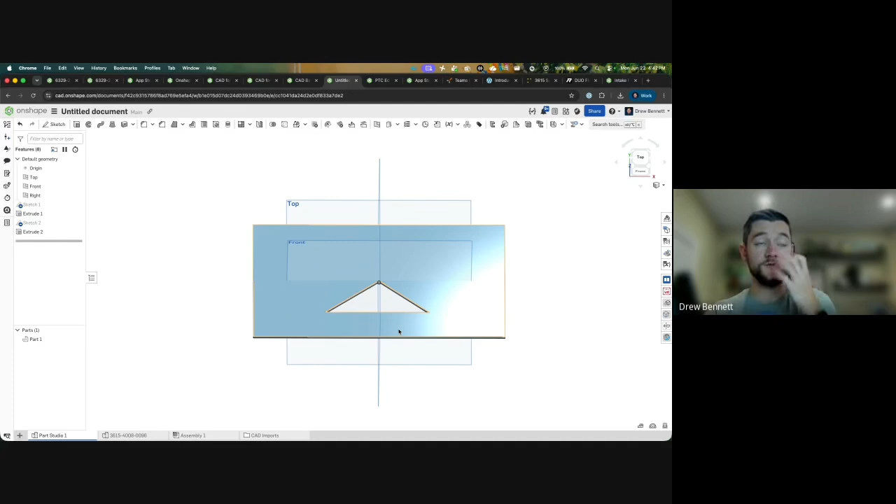If I were to just model a triangle like this and extrude cut that through, I would not actually be able to cut this on a CNC router, because CNC routers with their rounded bits cannot make sharp corners like this. That's not a thing. They always leave a little bit of a rounded corner because that's how round cutting tools work. So of course, you could do something like this.

What I would recommend, and this is stepping into the FRC space, but it's useful for you all as well, instead of trying to model this out yourself, there is a great feature script. Feature script is a thing that's part of OnShape, where it allows users to define their own different buttons along the top.

Of course, we provide a ton of different features for you to use, and they're all wonderful. But sometimes you want to add your own to make your life a little easier, and that is where feature scripts come in. Those are custom features that the community has written to do more with OnShape.

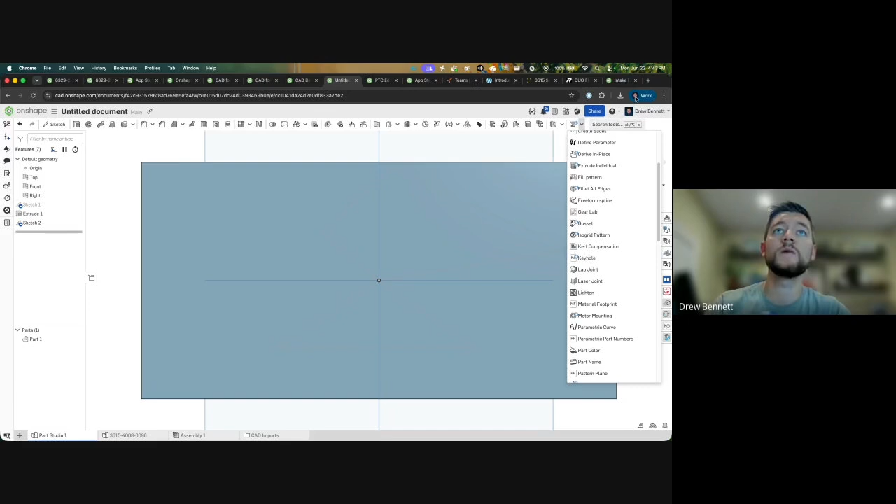As you can see, I have a ton of them. There's not a great way for me to provide these links over a webinar. So what I'd recommend is checking out, if you go to FRC Design feature script, they have a list of feature scripts here, and I recommend people look through them.

Some of them, as an FTC robot, you're not going to be using chain this big, but you will be doing some of these other processes like the fillet expert and the part lighten. This is what I'm going to show here. Also super useful for making gears.

A lot of teams like to 3D print their own gears. Of course, you don't want to model a gear yourself, so you should use the feature script that'll generate the gear for you. So with this website shown, I'll now show again how you can use this for manufacturing.

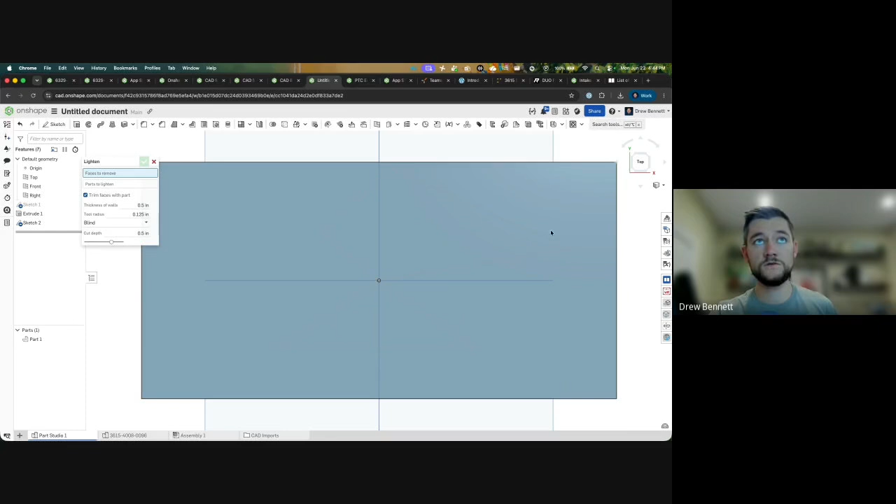I've now made these two funny cutouts, and I would like to remove that material from my part. Instead of doing it through a bunch of different features, I can use the lighten feature, which was shown in that list, and I can simply click the two areas, and it'll allow me to set what I want the tool radius to be.

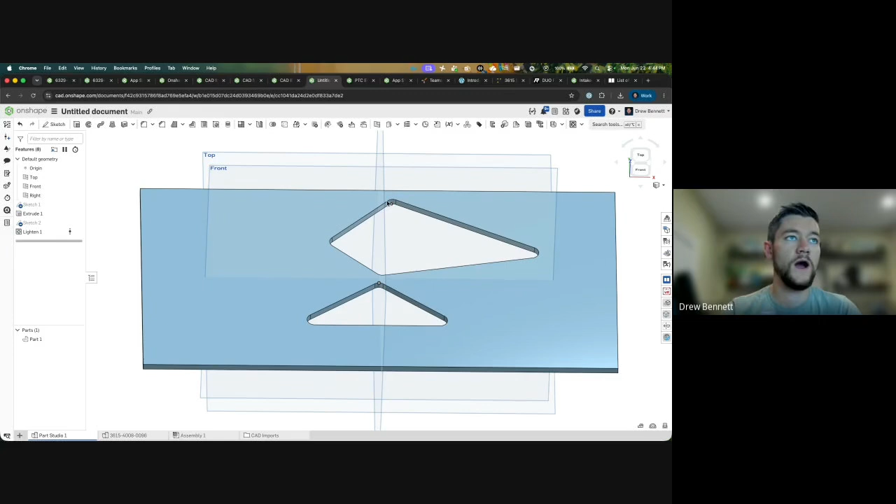So if I'm cutting with a quarter inch end mill on my router, I know the minimum it can do is an eighth inch radius. So I could say, yeah, I'll make that an eighth of an inch. I'll make the thickness of my walls also an eighth of an inch, and you'll see it'll now round those corners for me. So now I would be able to very easily manufacture this on my CNC router.

So doing stuff like this, using features like part lighten, and there's a couple other features as well, can make it much easier to manufacture components. But it's a great question, it's a really deep topic.

We do get into that somewhat in that Intro to Robotics curriculum course that I showed. It's in the OnShape Learning Center, but there is a topic about manufacturing, so we'll check that out.

But really, my number one recommendation is just from the get-go, think about what tools you have on hand and how you want to make a given part, then think about the different limitations that gives you: it needs to be flat if it's on my router, or if it's 3D printed, how can I make sure there's no super thin sections that are going to want to snap?

And do I have a good part of the 3D print to put on the print bed that'll stick to the bed well and print easily? My best recommendations. Cool. What other questions?

I have a question. What are the most common OnShape mistakes new FTC teams make, and what are the easiest ways to avoid them?

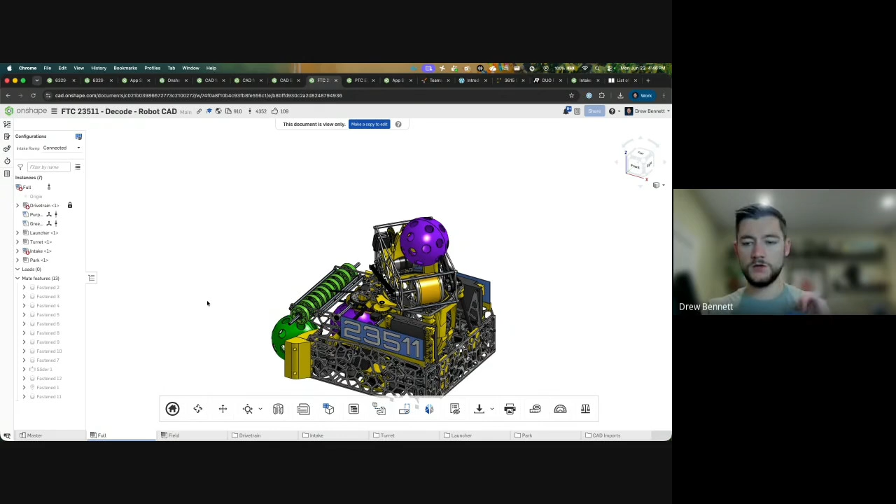Yeah, great question. I'm just going to pop back and get this robot back up. Honestly, the number one mistake I see is that teams are designing the whole robot in one OnShape document. Even with good organization like this, the way an OnShape document loads, you boot up OnShape, log in, go to access your robot, and it needs to load all these different tabs in the document. When you have all of your tabs for every part of your robot in one place, it can take a while to load. As you saw for me, it was relatively quick on that initial load, but it can start to get slow.

So the number one mistake I see - some teams reach out and say, why won't my FTC robot load anymore? I'm getting close to competition, I need my OnShape model now because I need to make some last second 3D parts, or finish my notebook that I'm going to give to the judges. Why won't my OnShape document load? I open up the document and they have like 150 tabs in one document. Yeah, I'm honestly not surprised that won't load. Nothing will really load at that point.

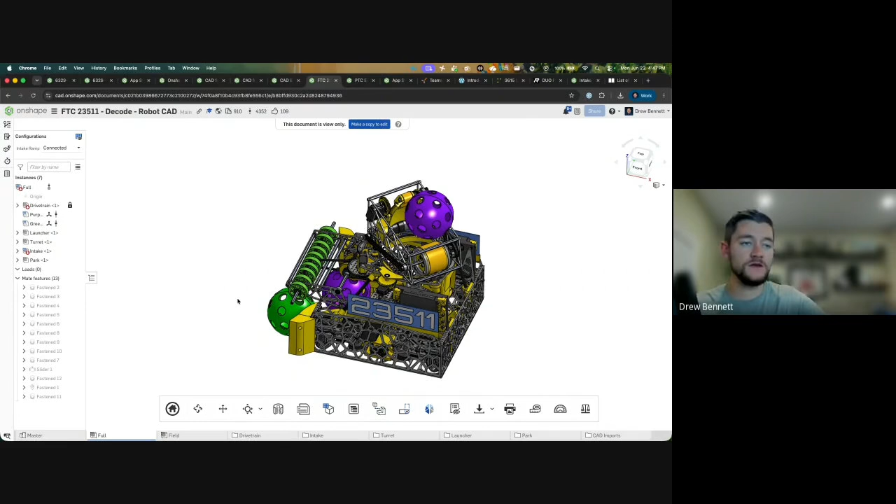The second largest mistake I see is that teams don't know about the FTC parts library, and they spend a lot of time importing parts from vendor websites, which takes a lot of time. You have to go to the website, find the part, download it, and import it. None of the steps are hard, the process is simple, but it takes time.

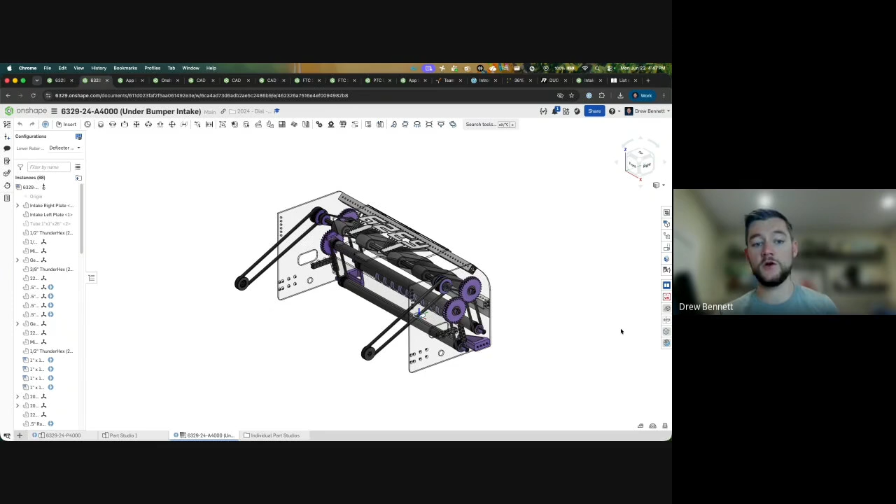Where instead you could just go to my tab, or I'll pop back here. If you have the library app, instead of having to go find the component, you can simply click on the app and immediately have a perfect model of any adapter, wheel, or structure you want.

Yeah, I think those are the two. Do I have any others? No, I think those are the two biggest mistakes. Really, it's just organization - use multiple Onshape documents. That's the number one thing I see. Cool. What else we got?

In terms of errors, like actual errors in the part studios and stuff, are there any built-in tools to check if two parts are colliding or interfering with each other before we actually build?

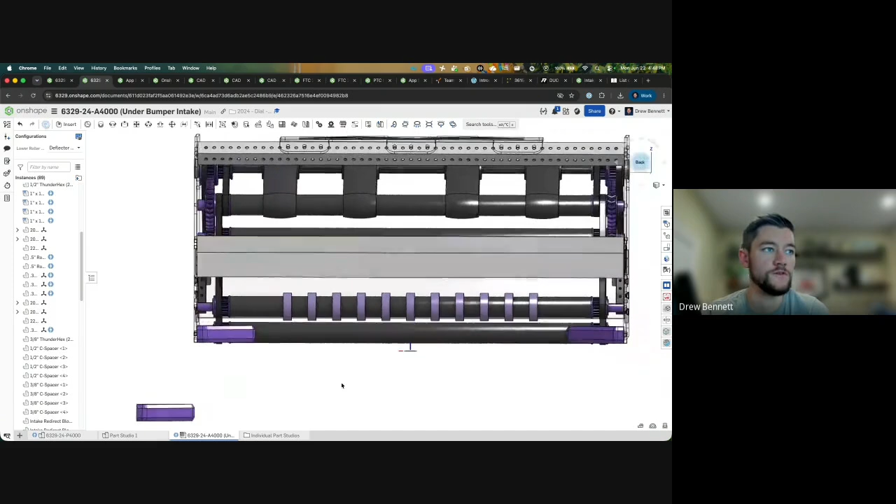Yes. So what's a good way I can show that? I'm just going to very quickly duplicate a part here and move it so that it is very, very slightly hitting another. I'll show you what I would do here. Let me get this in position and we'll talk about it.

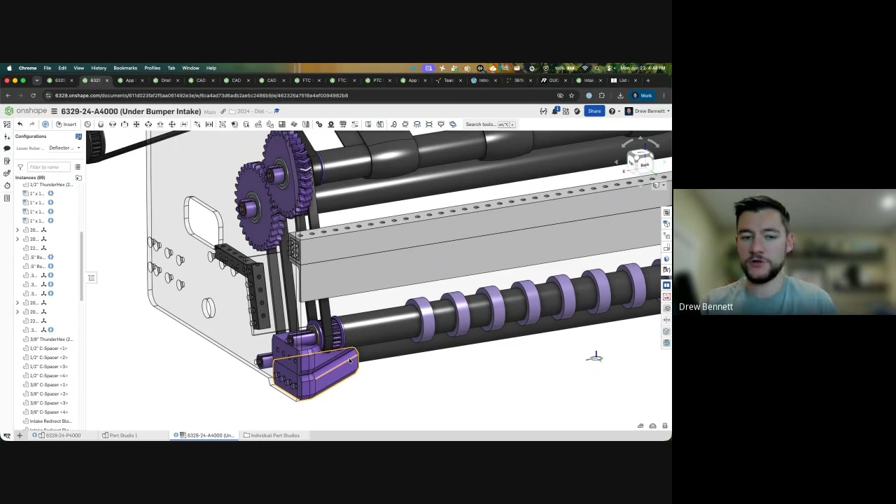All right, so if I move that right there - let's say I was trying to make this little angled diverter. Honestly, I feel like this is a pretty common part that teams make. It's a little angled ramp to help divert a game piece, whether it's a sphere or something else, through your intake and center it up so it properly goes into your launching mechanism.

Of course, they need to be pretty close to the rollers, but obviously can't be going through the rollers. So let me scoot this down just a little bit so it's barely hitting. All right, so I might say that looks pretty close. Is it good? Is it not?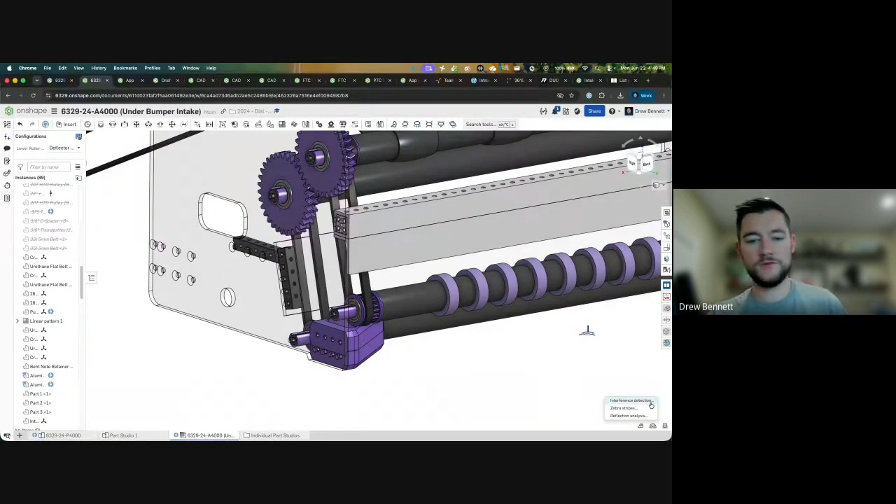You can use the analysis tools along the bottom - there's interference detection, and it does exactly what you think: it detects interferences. You can open that up, and it will ask what you want it to look at. I can just drag-select a bunch of different components, and it will highlight what is hitting. Obviously this is hitting the lower one because I didn't hide it, but you can also see that it is clipping the belt right there.

That little amount of plastic is going to hit the belt, and it's also just barely going to rub on the edge of the pulley. So I highly recommend using interference detection if you're designing things that are going to be really close, like part of your intake when it folds in is going to be really close to another set of rollers, or you've got a servo linkage arm that is going to slide right by another component.

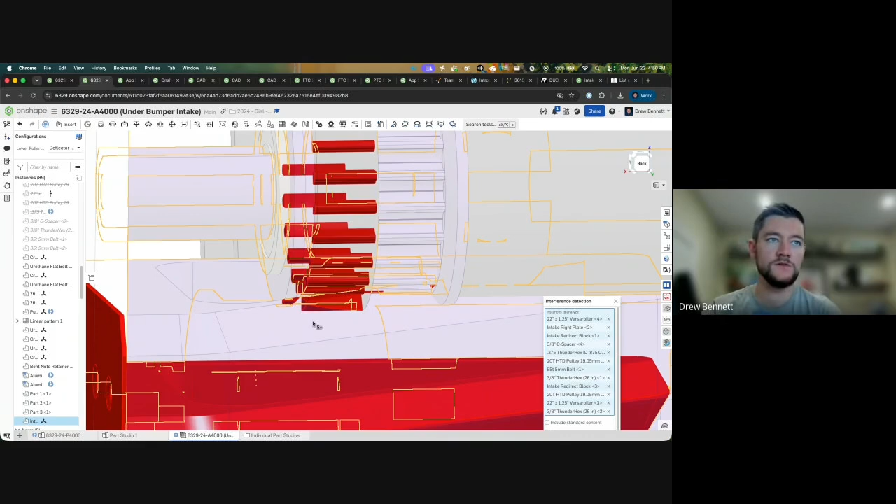In your assemblies, you can move it throughout and use interference detection to determine if it's going to hit or will it clear. Another thing you could do is, if you do actually have space and you can visibly see it, but you want to know how close it is, a lot of the time you can just click on the two faces that you know about, and OnShape will tell you what that minimum distance is, and along what vector it's close.

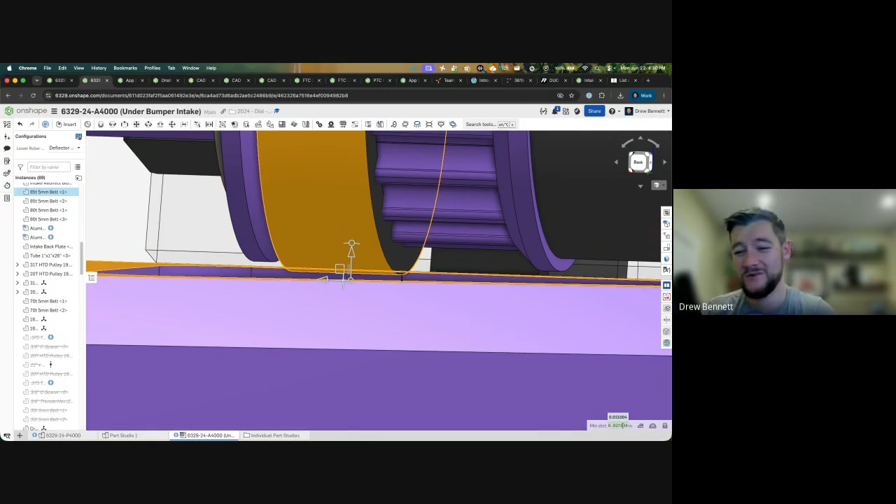You can see, just between there, if I look really hard, it says it got about 20 thousandths of an inch of clearance, which really isn't enough. But between interference detection and just using the built-in measuring tool, OnShape has an additive select where when I click one thing and then click another, it does not unselect the first one, it just has both highlighted. Makes it very easy to choose two different things and get a measurement between them. So that's one way you can check if things collide in your assemblies. Interference detection, super helpful.

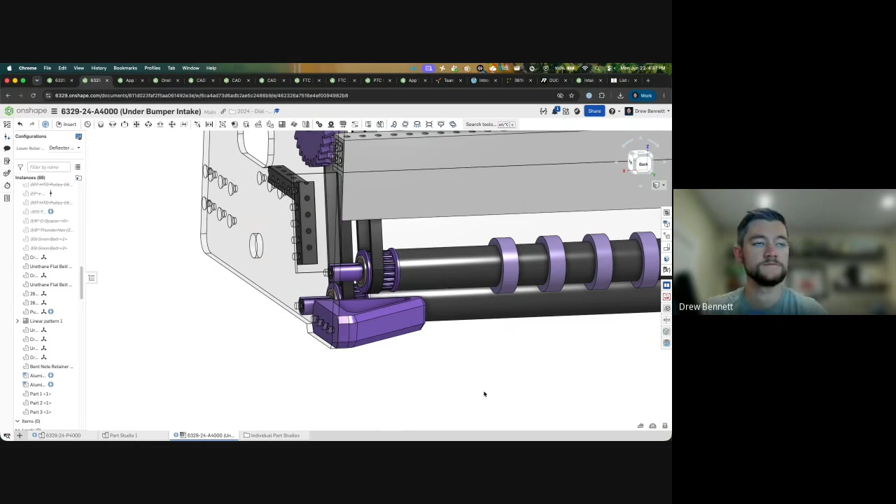For a brand new FTC team, just starting out with CAD, what's the most important thing for them to master first?

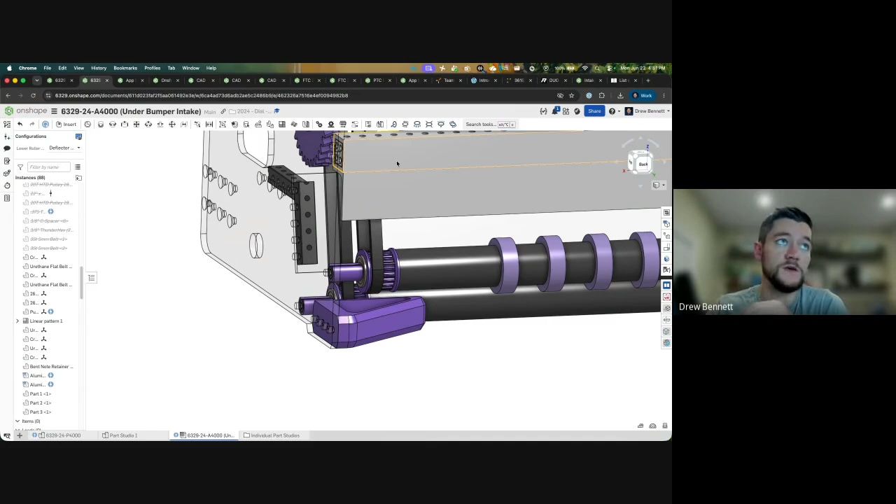Master first is organization practices. I keep saying it, but a lot of teams will succeed or not succeed based on how they organize their parts and assemblies. If everything is poorly labeled and poorly named, it's going to be impossible to figure out where that part came from when it comes time to print replacements, or if you're looking to make an upgrade. If you can't find the original, you can't really make an upgrade. So it really comes down to learning how to make parts, make assemblies, and do so in an organized fashion, which the Learning Center does so well when it comes to being new to CAD or new to OnShape.

New teams getting started, if you walk through both of these, as well as take a look at the FTC specific resources... I just have both of those open, same thing, I totally lost track of my tabs at this point. But also, if you use the FTC curriculum, honestly you will be in good shape. So it's really just about setting good ground knowledge around making parts in an organized fashion, making assemblies in an organized fashion, and then organizing your overall robot well. That is the number one thing teams need to focus on.

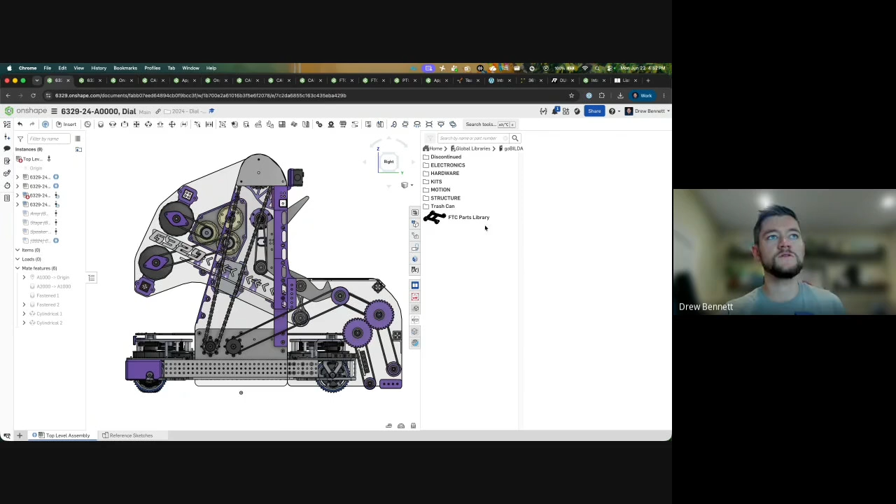And you know what, as another one, get familiar with all the parts that you have access to, like open up the library itself. And I think this is another common one I see, that teams will sort of dedicate themselves to just one build system. And I mean, that makes sense, it's nice when all of your parts fit together really cleanly. But a lot of the parts and a lot of the different part ecosystems are relatively interchangeable. There's a lot of adapters you can use to go between all of it.

So the teams that design the best robots do so with the best parts. They are aware of what AndyMark has, what Rev has, what goBILDA has, what all these different suppliers have, and they are picking the best from each one to make the best robots. So it's really important to spend some time and get familiar with how the robot system from AndyMark works, how all of goBILDA's different tubing structures can fit together, how you can combine them with different intake wheels and motors from Rev.

The more familiar you are with the things that you can purchase and have on hand, the easier it's going to be to prototype and build a good robot.

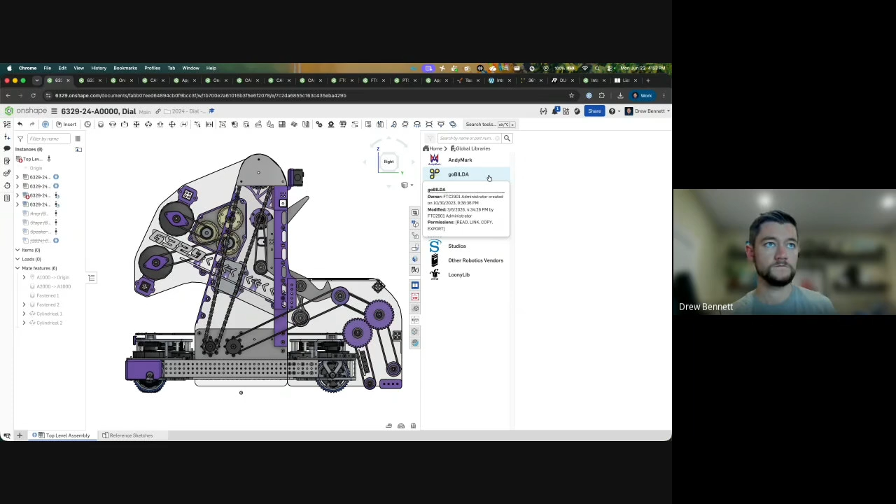Does anyone else have any other questions?

For a mechanical designer designing systems for an FTC robot, like a gear train or a belt drive, what are some of the best tools that could help ensure the system is cohesive?

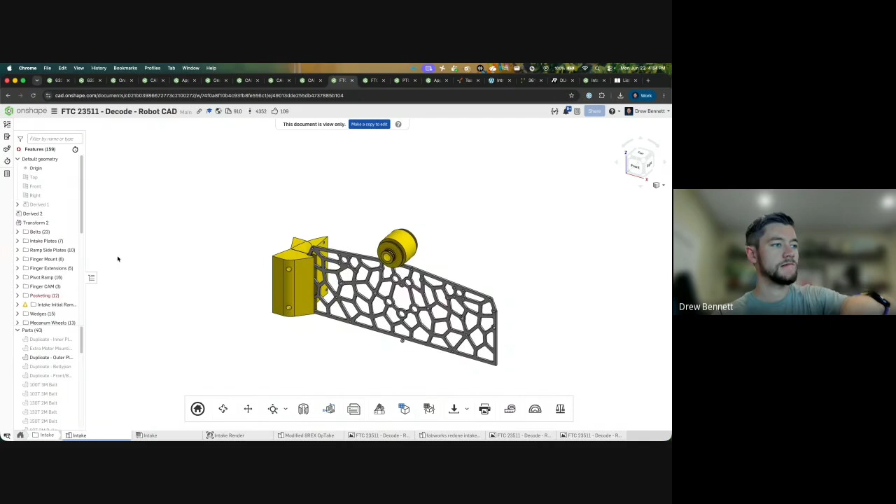There's probably some very specific FTC feature scripts and calculators that I'm not privy to. So I would absolutely recommend, whether it's on Reddit or different forums, figuring out what teams are using. Actually, I'm pretty sure I saw it in here. There was one really good feature script I like. So in here, there is a feature script, the C2C calculator.

I'd recommend you can find this model of the Seattle Solvers robot from the FTC Open Alliance page. If you go to the C2C calculator and right-click an open linked document, you will be able to add this FTC design feature script to your account. This feature adds a bunch of equations to your OnShape part studios.

That can automatically do belt and pulley spacing, gear spacing, and 8mm pitch chain spacing. So as a mechanical designer, when you're figuring out your gears, instead of pulling up some outside website to calculate, okay, I've got my 12-tooth pinion gear and I'm 3D printing a 30-tooth gear, what's the spacing on that? Using the C2C calculator and the automatic built-in gear functionality, it can tell you exactly what that number is going to be in your sketches.

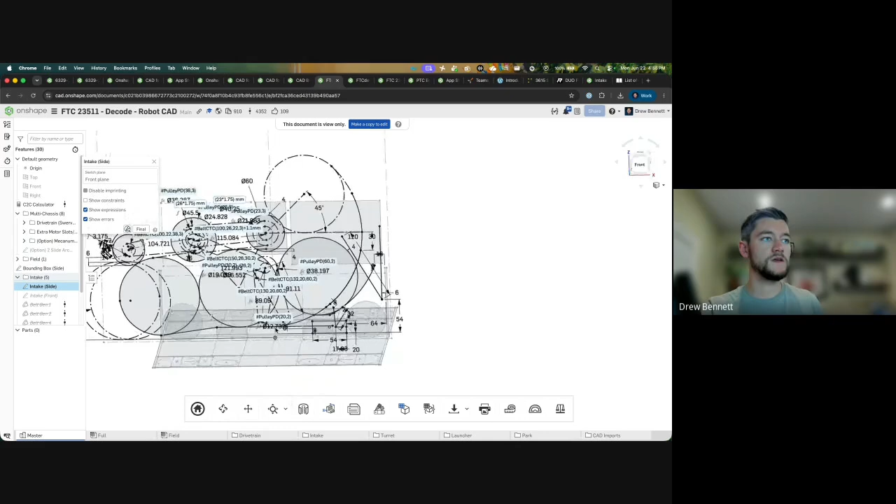So I bet if I open up the intake and look at some of these, you can see they're using a lot of them. For example, this belt CTC. When they drew out these two circles to represent the center points of the two shafts, instead of trying to go to an outside website, they're able to say, okay, I'm going to do a 100-tooth belt, 22-tooth pulley, a 38-tooth pulley, and it's a 3mm pitch, and it's going to tell you it's going to be 104.72 millimeters between, and that'll be a perfect spacing for your belt.

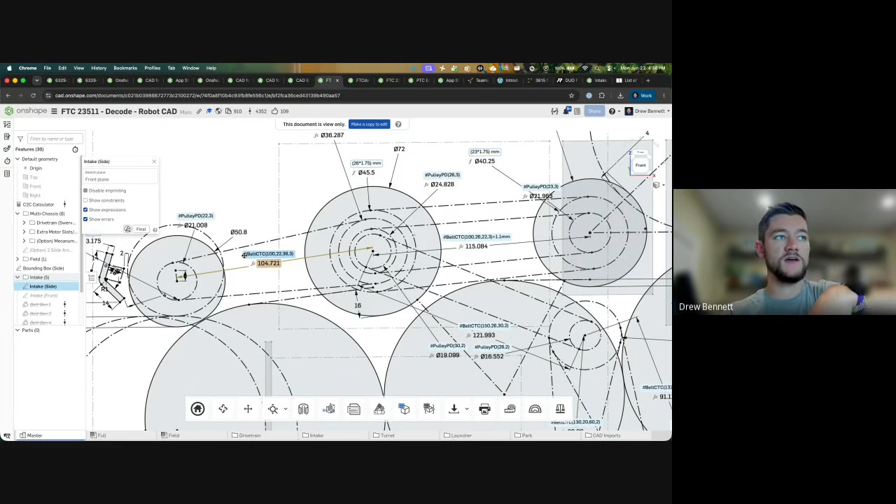This same thing applies to different gears. For belts, it's hashtag belt CTC. You could also use hashtag gear CTC to space out gears. Using these built-in functions is going to make it a lot easier to ensure that everything actually fits the first time. Same thing, not only does the belt need to fit the two pulleys, but you need to make sure the pulley itself fits in a given area.

So you can use something like pulley pitch diameter or pulley OD to tell you how big it's going to be. All these different things save you the time of needing to figure this out yourself, and allow you to simply type in information and it will automatically dimension things for you. So I highly recommend grabbing this FTC Design C2C calculator feature script.

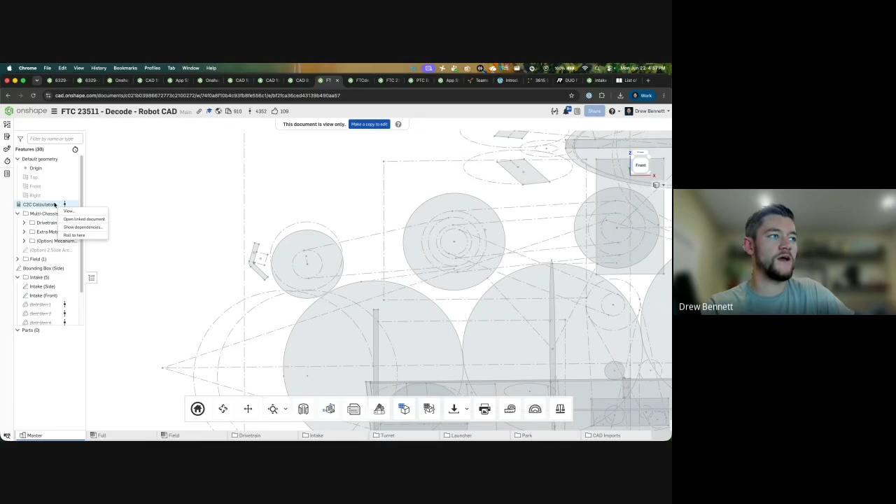Feature scripts are really easy to add. If you want to go from this document, once you have this open, there's no great way for me to provide links over YouTube, but you can get this through the Open Alliance website. Once you have it open, you can right-click, open link document, and then you'll see there's a button that'll say essentially add feature script. It does take a second to load, but it's pretty cool.

So I'd highly recommend doing that. I'm really hoping it loads up quick so I can show this. Yeah, you can see custom features right here. You can click on that, and then you can add the C2C calculator. It'll say add it to your toolbar. It's that simple. Now I have it, and I can keep using it as long as I want.

All right, we're basically at 5 o'clock, and I'm tired. How was that? Is there anything else you want to ask to end this off, or do you think we're in good shape?

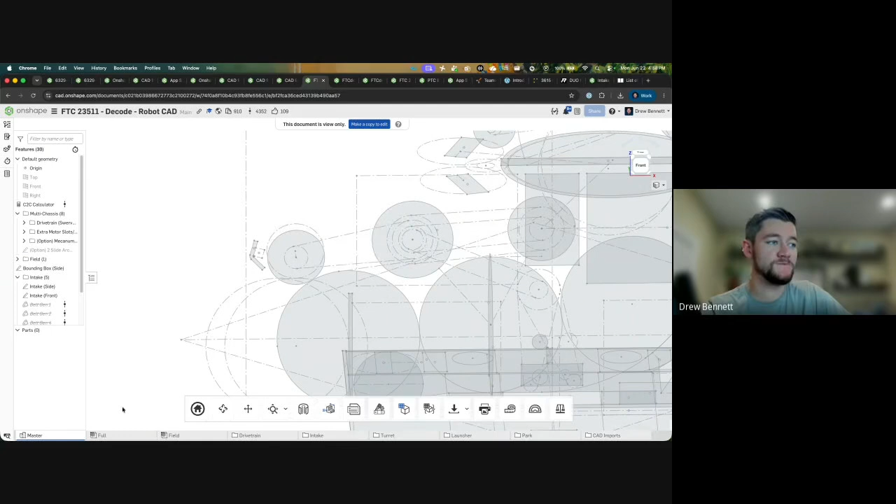Thanks for coming, that was a really great demo, and I think many people will find this really helpful. Good, I hope so. Again, there's a whole lot of information here, and it might be worth people rewatching and skipping around as needed to find information. But yeah, there's a lot of good information here and a lot of things that can be taken away from these models. So thanks for having me.

I appreciate your time. Thank you. Thank you.